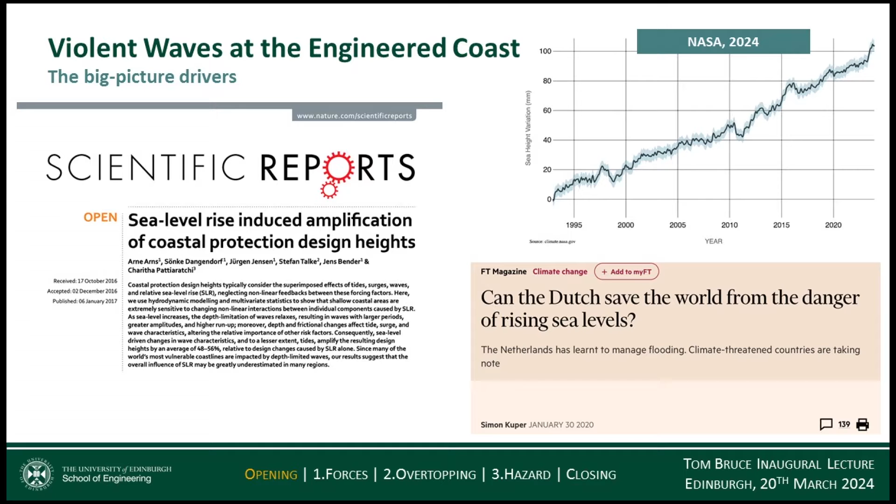And as we'll see later in the talk, 100 millimeters is quite a lot, because what happens at vertical walls when these waves are violently hitting them, the responses are very, very sensitive to the wave height, and they're very sensitive to the water depth. So the bigger waves can get in closer to structures on deeper water, and also if your structure is so high and the water has gone from here to here, your structure is not as high as it used to be relative to the water. So that's a big deal for us. And as you can see in the Nature technical report there, there's a real amplification effect with sea level rise and the responses of coastal defences.

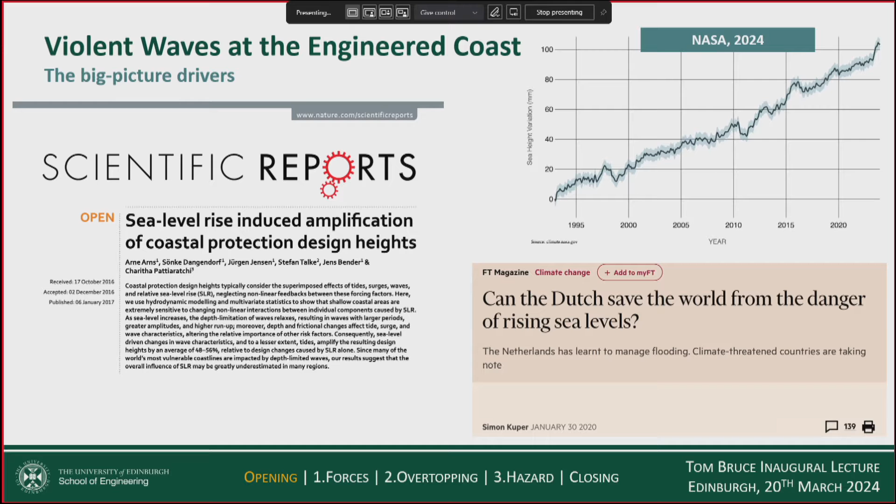Down the bottom right, can the Dutch save the world? Well, the Dutch, of course, can save the world. But the point of putting that in here, it costs. The Dutch have been investing in coastal defence since the disastrous North Sea flood of the mid-50s. And they invest something in excess of 0.1 of their GDP, year on year, decade on decade. And we don't. And so yes, you can defend if you're prepared to pay for it.

So one of the reasons for doing this work is to drive down uncertainty. Uncertainty is the enemy of costs in engineering. Having to manage large uncertainties drives costs only in one direction. And so if this work, of myself and all of the colleagues, can drive down that uncertainty, that is a contribution. So that's the context slide. Hopefully, James, that's satisfactory. Thank you.

We're going to now, if I can make this work, see what you think should be in a good inaugural lecture. This is where I first have to use the keyboard. So we do Alt-Tab, and we go to, where's the WooClap one going? This one. And hopefully we see what you said.

So what have you said? You've said, oh, I must have put my own name in there dozens of times at the start. Youngish-looking professor, fun. I started it off by putting short, but nobody's repeated that. One of my wonderful, amazing daughters put, don't have to wait 6 years. Thank you, May, for that.

So what have we got? Clear sound, wine, committed to live a good, don't know, good, we'll know at the end. So that's fun. Focus on the future, yeah, good. Fantastic, and some jokes. Okay, so thanks for that. We'll capture that, and I don't know if I'm going to be able to adjust my talk dramatically, but there's...

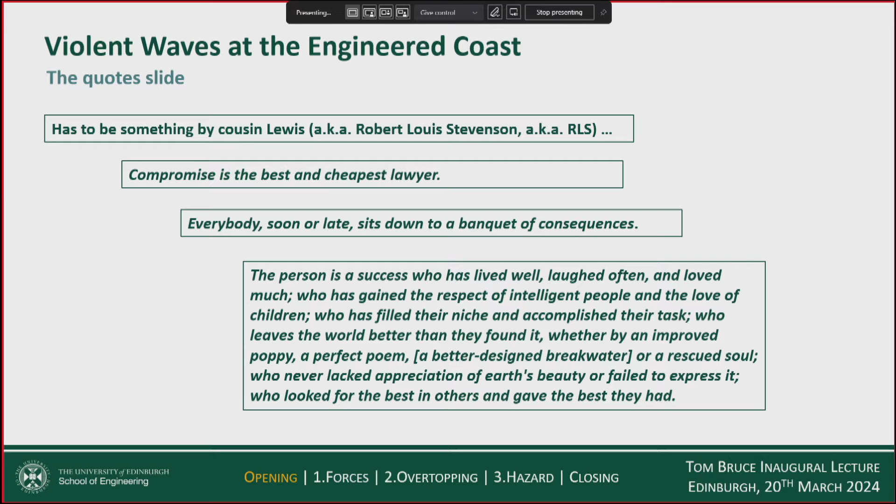So I won't do PowerPoint karaoke, but do take a few moments to read that or catch up, because I think these days it's very difficult sometimes to look at yourself and feel valuable and feel valued. I think it's a beautiful quote that hopefully absolutely everybody in this room can read and feel that you are worth it, you are valuable.

I changed it a little bit as well. I did think that there was probably a bit of, I'm sure RLS of course was from the amazing Stevenson family—I'm going to diverge and go over time, this is a disaster, I promised myself I wouldn't—but RLS was from the amazing Stevenson family.

His father, his uncle, his grandfather were amazing maritime civil engineers. They built some of the most extraordinary lighthouses in the most exposed places. Robert Louis was known as Louis in the family, and he changed his name as an affectation because he liked French, so he was born Lewis. Louis was meant to do engineering, and actually, Louis students here, he was one of you. He was a civil engineering first year, twice as it happened. He begged Professor Fleeming Jenkin to let him back in for another go, and he failed a second time. Then he went off to do law, and he went off to write. So he was not a great civil engineer, but he was a very extraordinary man.

Okay, so we're getting through, trying to gallop through the traditions of inaugurals. People put up wonderful maps of how they've trotted the globe around all sorts of amazing places, lived in amazing places and worked in amazing labs. So this is a very short slide for me. We might zoom in a little bit here, and zoom in a bit more. The good thing about this is you can see I've actually lived in more than one house.

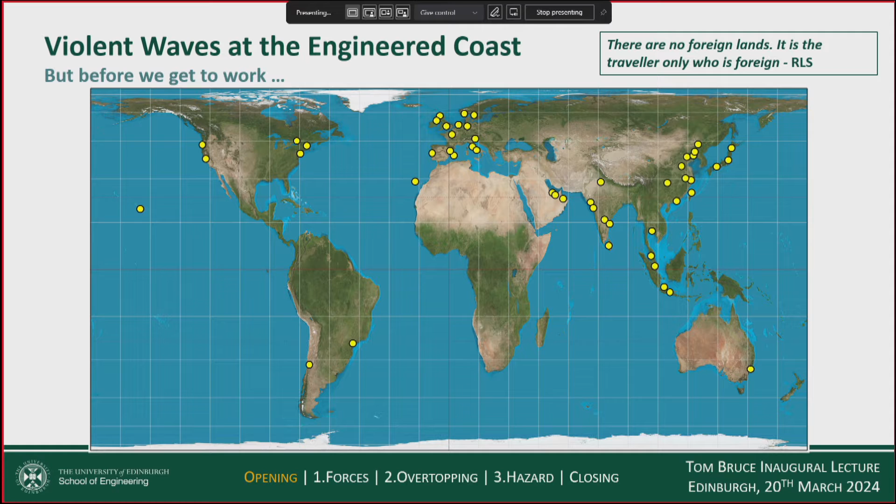I'm a little ashamed that I've never set foot on the amazing continent of Africa - that's certainly the next challenge. But I've been very lucky to travel pretty widely for work and also travel fairly widely for holidays.

And you'll see the green dots and the yellow dots don't all match up, so I've not just been traveling at your student fees' expense - you see most of these are proper family holidays.

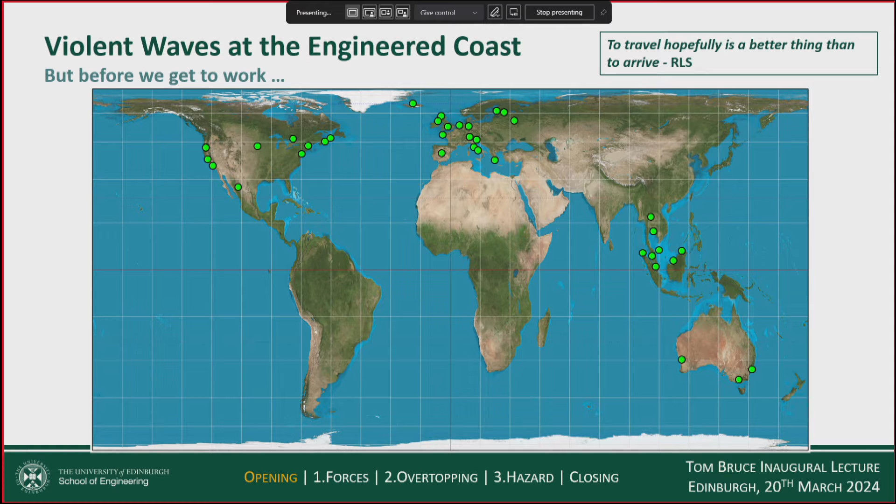And as a nice aside, I missed pointing you to the two little RLS quotes. I think the RLS quote up the top, he was just 130 years ahead of his time in some ways: 'No foreign lands, it is the traveller only who is foreign.' And the better known one: 'To travel hopefully is a better thing than to arrive.' Although we do like to arrive as well.

And the final bit of the intro is that we like to usually have action man or action person. So I don't get much time on the mountains, but I do love being on the mountains, so we share some pictures on the mountains.

My amazing family - that's Claire's graduation from the Open University last September, which was the most fantastic occasion. Bachelor of Arts with distinction from the Open University in English Lit. So we're all incredibly proud of Mom.

And down the bottom, the very cute Mark, not looking so cute in the bottom right with a whole bunch of fox poo on her, which took two washes, and thanks to May and to my sister Sarah for helping clean up the dog at the weekend.

So how did I get here? I got here starting out doing work with Clive Greated and Bill Easson and Dave Skyner, Matthew Griffiths, using a laser flow measurement system - a system called particle image velocimetry. It was mostly applied to water flows, but we hadn't applied it to waves before.

I bumped into a gentleman called Hocine Oumeraci, who was chair of coastal engineering at the University of Hanover at the time, on a visit there. Bumped into him in the staff room, which you wouldn't believe how smoke-filled it was. He thought this would be an interesting thing to do, and lo and behold, it really was. So we did some PIV to look at what's actually going on under the waves as they steepen and come and smash into vertical walls.

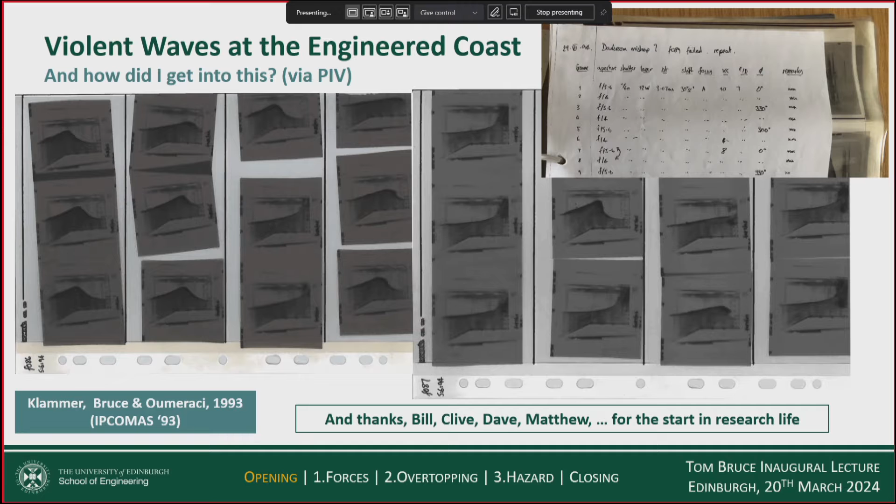It was really new at the time. You can see it was all done with a large format Hasselblad camera. If you look very closely up here, my lab book from the 29th of June 1994 says darkroom mishap, film 089 failed, repeat. So it was harder back then. If you got things wrong in the darkroom, you had to go back and do all the tests again.

That got me into this whole idea of waves and breakwaters. So finally, this is what we're going to do. I've been involved in a variety of bits of research. I've been very honoured and very proud of being part of the Institute for Energy Systems when it was formed, and I've had a number of projects in marine energy. I'm still active in marine energy through our Industrial Doctoral Centre for Offshore Renewable Energy, supervising projects there and doing a little bit of teaching. I've been active in hydropower a little bit too, but I thought for today we should stick to one theme.

So I'm going to try to stick to a road through violent waves at the coast. We could have done some other things, but I'm going to stick to that because that's been the constant narrative through these 25 to 30 years. So we'll have a look at wave forces, the forces on the structure, we'll have a look at wave overtopping, what goes over, and we'll have a look at hazard. That's the plan for the next hopefully about 35 or 40 minutes.

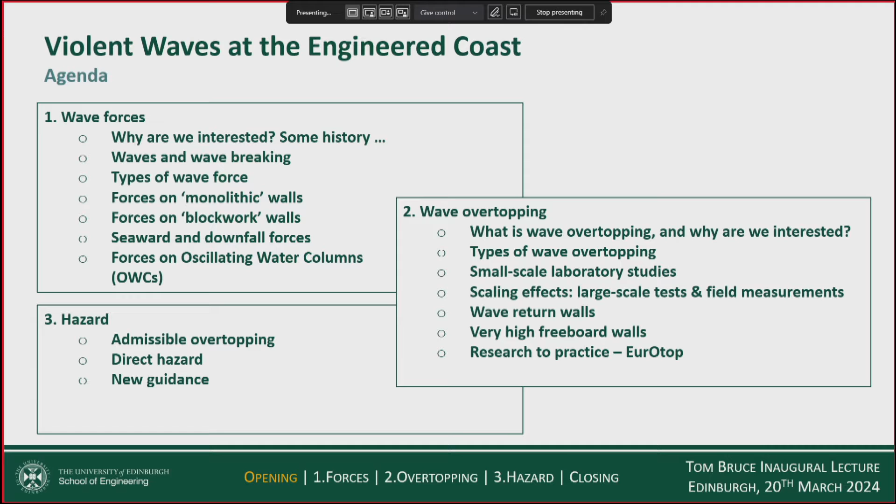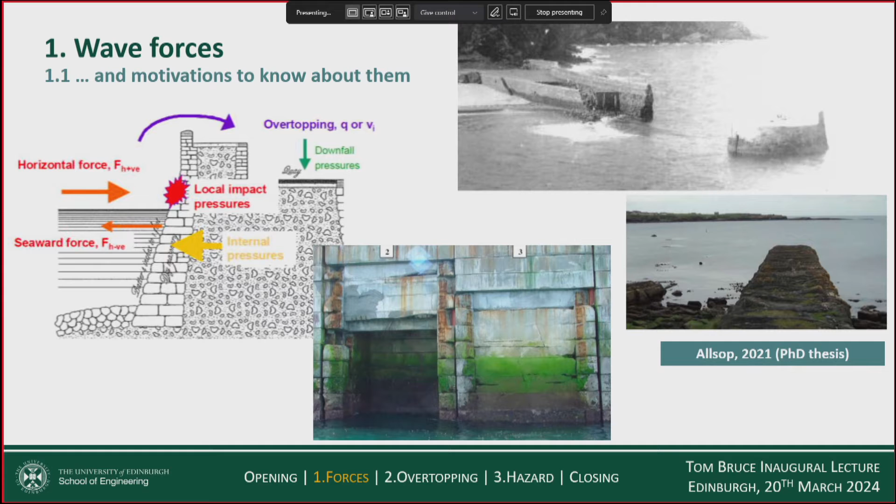So this tells you it's a complicated loading system. You would intuitively get the big orange arrow here, the horizontal wave force on the structure. You might guess that we might get this red splat, which is the breaking waves on the structure, the impact loads. You might also guess that we had some water going over the top, which could load the structure. Few of you would guess the right to left arrows, the seaward forces. We can get seaward forces due to a difference in the internal pressure in the structure to the pressure outside, and due to the way in which the wave is interacting with the front face of the structure. So we can get seaward forces as well as landward forces.

So we're going to take a little gallop through some of these over the next slides. I had intended not to include any photographs of anybody in the talk, but I really felt that I should put this one in for Clive.

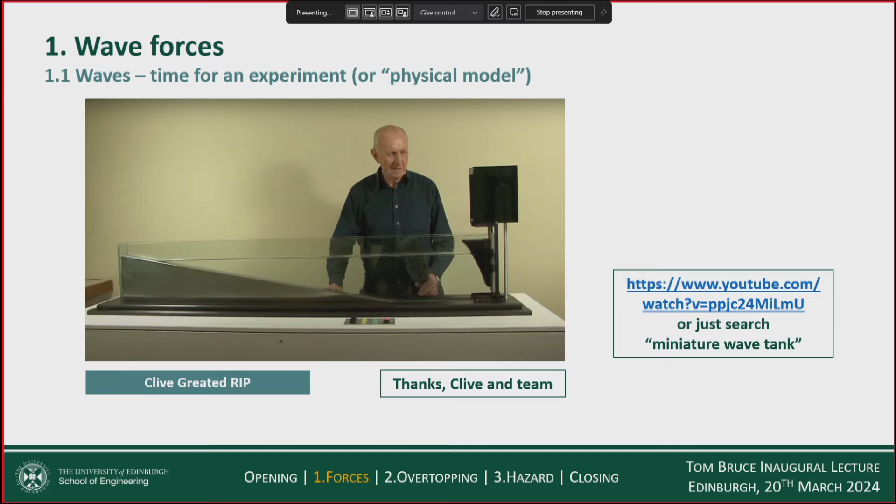Because what we're about to do is use this little wonderful piece of apparatus that Clive, his research team, and the technician team over in physics put together many, many years ago. Clive's daughter is a lecturer at the Glasgow School of Art, and she and her dad put together a really special exhibition called Coast, bringing together science and engineering and art around the coast. And the centerpiece of it, this is the great reveal, is this rather beautiful little wave channel.

Everything is in perfect miniature, and the paddle is still in the right place, I hope. We will find out in a second. It looks pretty good, I think. So thanks, Clive, for putting this together, and thanks to Clive's family for pointing me in the direction, and thanks to colleagues Neil Wood and Jim Folek in physics for having looked after it so carefully and finding it and letting me borrow it for this talk. If you want to see Clive in action, you can search miniature wave tank on YouTube and you can get Clive's original commentary. So thanks, Clive, and we are thinking of you.

Okay, so what I want to do then is play with this. With a bit of luck, if I put this behind and press the right buttons, we'll get a good view on the camera, which means those of you who've chosen to sit right at the back will still get a decent view. So hopefully that will go there. And if I press the right things here, that one, then we might have a magic wand. Well, hey, we do. This is where in class we zoom in on the sleepers. Which of course we don't have to do too much. So with a bit of luck, I will be able to run this and point this at the flume as a wand and let those of you further back actually see what's going on as well. So let's get it started and have a look what we see.

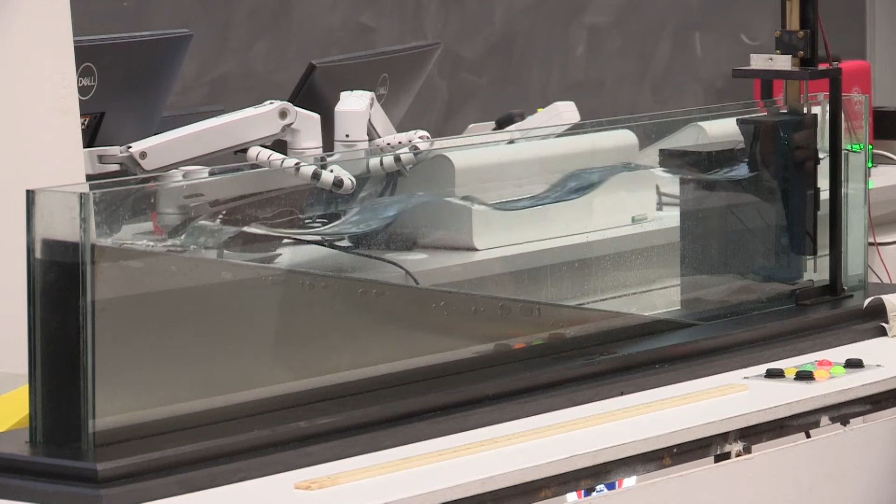So what happens? And we could do a couple of lectures on this stuff. We can put in different slopes. We can look at different behaviors. But what we want to do here is put in a vertical wall. Okay. So thank you very much, Andrew, for the vertical wall. The wonderful thing about tiny flumes is that everything is extremely quick and easy to do. It's quick and easy for Andrew to do, not for me. I'm sorry, Andrew, I was very disorganized. So let's put the gentle wave in. And I'll put my wand over here again. If we put this little vertical wall in reasonably deep water, you can see that the water's running up and running down.

The wand is in a good place. Okay, so that's what we might call a pulsating load. It's not terribly exciting, it's reasonably easily predicted. This is a very simple flume, so the wave energy is just being reflected back to the paddle, and it's reflected back off the paddle and coming back down. Whereas in reality, the wave energy goes back out to sea.

More sophisticated flumes, any serious scientific flume, the wave energy is reabsorbed at the paddle, so you don't get that build-up of energy. So if we put this in a little bit further up, we're going to see something rather similar. But if we happen to put it in where the wave is breaking, we're going to see something just a little bit different. I'll just start it again.

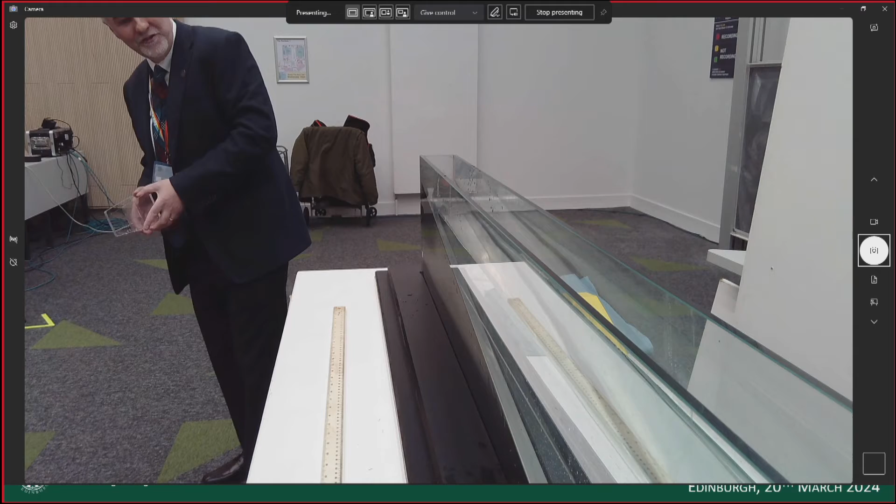You'll notice as well that if I stop it with the vertical wall in, it takes a while for the energy to dissipate, and if we let nature do its piece and dissipate on the beach, on the foreshore, it dissipates very quickly. We could do that with the rough wave, and we can see in reasonably deep water that we've got, again, pulsating loads, so slowly varying loads, but this time we've got some overtopping.

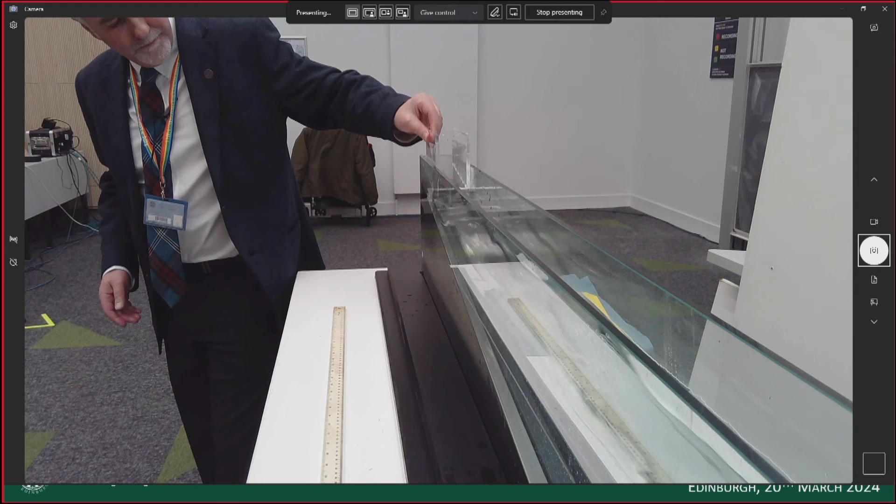Now I'm going to take it out before the standing wave builds up too much, because we don't have any absorption down here. If we go slightly shallower, same thing. But if we go to where it's breaking, we've got something quite different, okay? So you can see that just that change in water depth makes a really big difference to what we see.

Right. So, I could hide now, could hide behind here for the rest of it. Our photographer would kill me afterwards, or kill me during.

Okay. So, here's one we did earlier, if I could press the correct buttons here and go back to the presentation. With a bit of luck, we can have a close-up view here. And of the fast one. What's more interesting is if we slow things down.

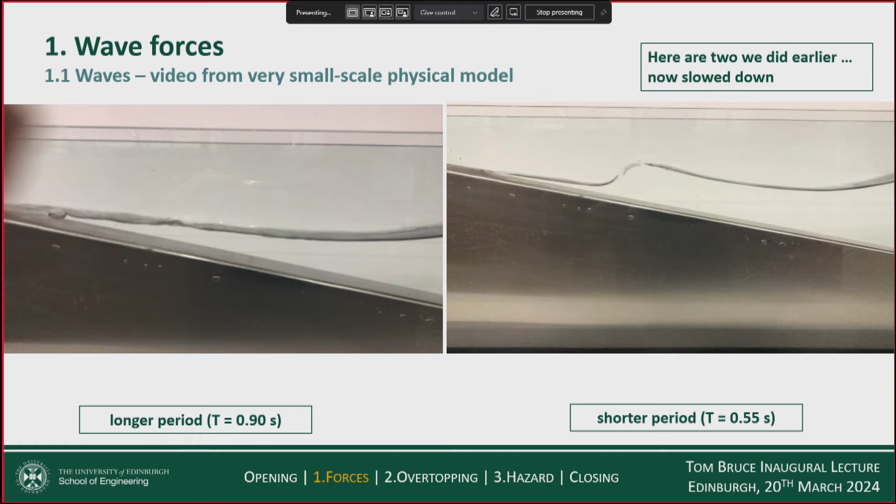So I said that research costs money. This was taken with my iPhone 8, which cost me £8.50 a month with Tesco. It's quite extraordinary. You guys who are working and a good deal younger don't realise this, but this would have been undreamed of. It would have cost a fortune to get a camera that produced anything like that.

Risk of diversion again. Our first digital camera that we bought for PIV had a frame rate of 1 frame every 2 seconds. It came with a cooling unit. It had 4,000 pixels and it cost £25,000. And it was monochrome. That's where digital cameras have come since about 1993. So big changes. And there's the slowed down one.

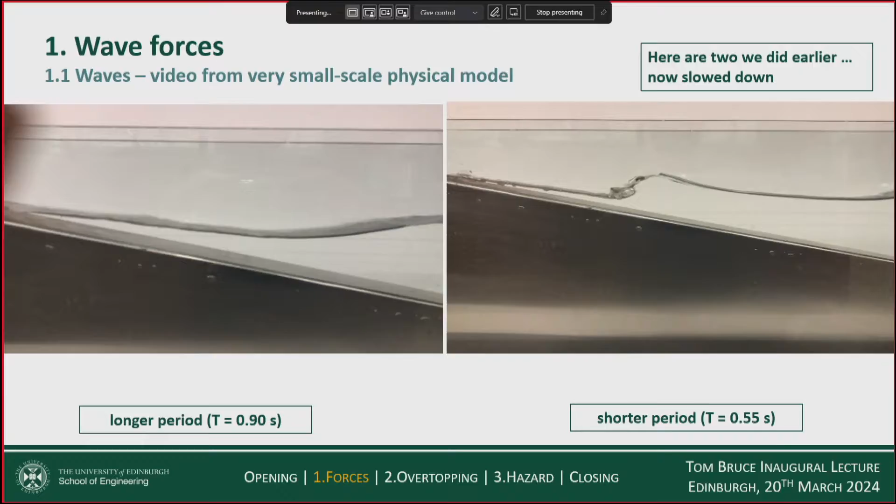So you can see the wave. Now, this is not a really accurate representation because this is such small scale. In Fluid Mechanics 3, we used to do a piece on scaling. I think it's probably still in there. And waves scale beautifully down to lab scale to a very high degree because everything's dominated by the interplay of gravity and inertia. But when you get really small like this, then surface tension is unrealistically big. And so the surface tension effects in the very, very small flume make this a little bit unrealistic.

Also, this is fresh water. The way in which bubbles behave in fresh water is different from seawater. And of course, the bubble doesn't know what size of wave it's in. And so the bubbles here are not behaving in a realistic way. But nevertheless, the overall kinematics are indicative of what we would see in a bigger flume or indeed in reality. And I think it gives you a nice sense of reality, seeing something almost tangible like that. I was going to do this bit later, but in the interest of time, I thought I'd put it all together.

Andrew also made me a Dutch sea dike to go in here. I'm not going to put it in right now. I filmed it earlier. Actually, it's not really a Dutch sea dike because it's at a 1-in-2 slope, and nobody except the British would build a 1-in-2 slope because it's the worst case for wave overtopping. So this is not a Dutch sea dike, it's a good British sea dike. But we can see some different effects on there.

So I did the same thing, I put that in, and what to look for here is that we're getting a different type of breaking. So there we had a little mini plunge, and here we've got waves that are really surging up the slope. And that's for the longer period wave. And if we put the shorter period wave in, we see the wave collapsing on the slope. And we can write a little spreadsheet that tells us what we expect and see if the type of interaction of the wave and the slope in the model is the same as what we expect in reality.

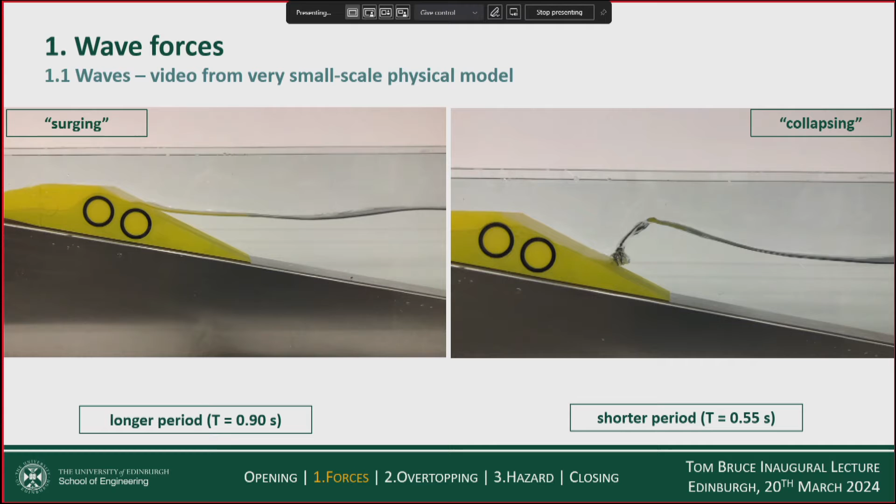So, I was going to do a bit of Excel Live. My students are probably fed up of Excel Live anyway, so we're not going to do it live because it was making me worry about the AV. So we do it almost live.

Just to show you how things scale. This is our little flume here with a 0.9 second wave and a 0.55 second wave. And the way that scaling works is that if we have a scale of 10 to 1 in geometric scale, then we have to scale the wave period by the square root of that, so about 3. And so if we reckoned that this was a 10 to 1 scale model, then that would give us a 3-second wave and a 1.7 second wave. Still really tiny waves, so that doesn't make much sense.

So if we tried something bigger, if we imagined this was 1 to 50, that would give us a 6.5 second wave and a 4 second wave. So it's still pretty short. Those of you that spend time at the seaside, if you're down after a storm somewhere, even on the North Sea coast, the waves could be coming in every 8, 9, 10, possibly even 11 or 12 seconds. If you're on the Atlantic coast, certainly 11, 12, 13 seconds. So this is still

rather short. So if we imagine 1 to 100 scale, we'd have a 9-second wave and a 5.4 second wave, still quite short. And so I reckon that we're something like a 1 to 200 scale here, because that means that our longer wave is equivalent to about a 13 second wave in reality, and our shorter wave is about a 7.5, 8 second wave. So those are quite interesting real waves to think about. We could spend a lot of time playing with the spreadsheet, and we won't do that. But scaling is a wonderful tool in the toolbox of fluid mechanics modelling, physical modelling of this type of system.

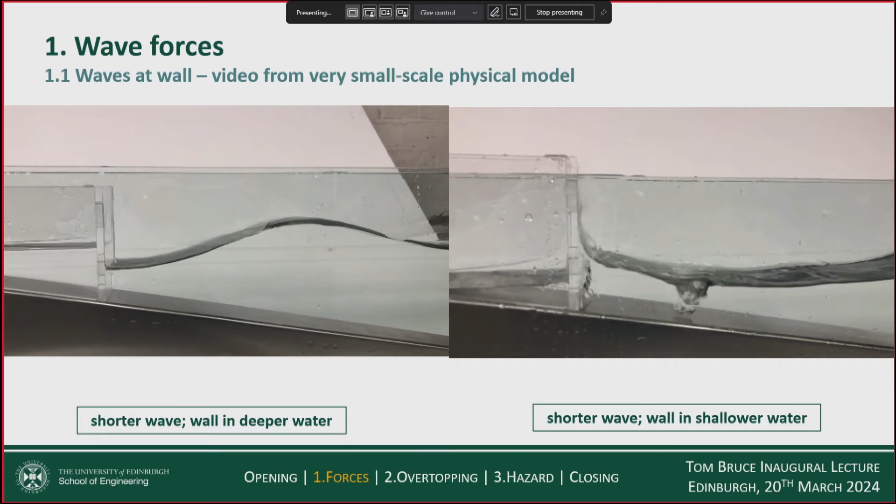So this is what we got when we put the wall in. I'm doing this just to make sure that people on Teams can see it. And so on the left is our pulsating loading, and on the right is our much more violent loading, what we might call an impact, or impacting conditions, or impulsive conditions. Okay. And we got the sound as well.

This is jumping ahead to section 3, which we'll get to, I hope, in good time. We're interested in what happens to people on the structures. How you scale a person at very, very small scale is not really well nailed down. We know that the person's stability, or in this case, the small screw's stability, is a balancing act between how much friction is available between their feet and the surface on which they're standing, and the drag force of the water around their legs. Drag force goes as the frontal area of their legs, so it goes as the square of a length scale, and it goes as the square of the speed.

The available friction goes with the mass of the person, and so it should go as the cube of the geometric scaling. So we ought to be able to scale the person correctly such that their available friction is at the correct scale to the drag forces from the water rushing around their legs. I did this very, very roughly, and I reckon that the scaling should be somewhere between cubed and squared, depending on the wave speed coming in.

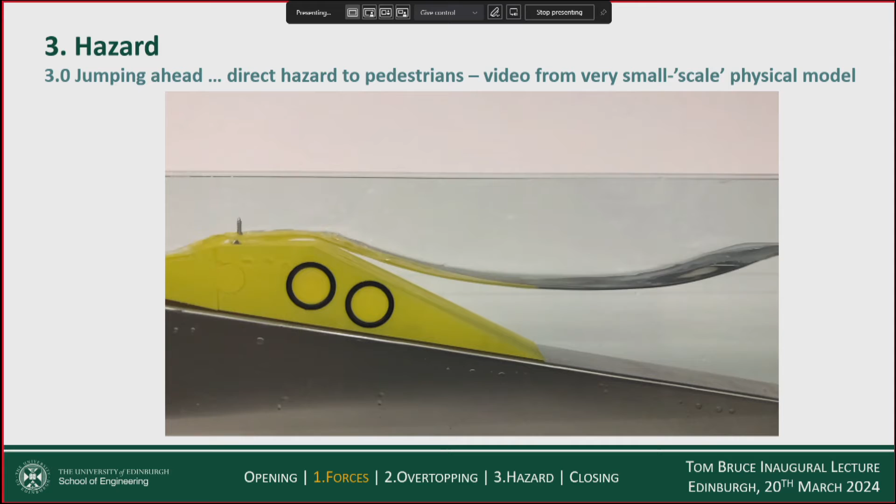And so I found something just under a 1 gram mass to represent a 60 kilogram person at 1 to 200 scale, squared and a bit. And we can see that I went through quite a few of these to try to get this just right, but we can see there we've got the drag force on the little person exceeding the available friction between the person's feet and the surface. So there we go. Off to safety, we hope.

Okay, so let's scale this up one. So this was tiny scale. Let's scale it up to our lab scale, the little flume in the Sanderson building.

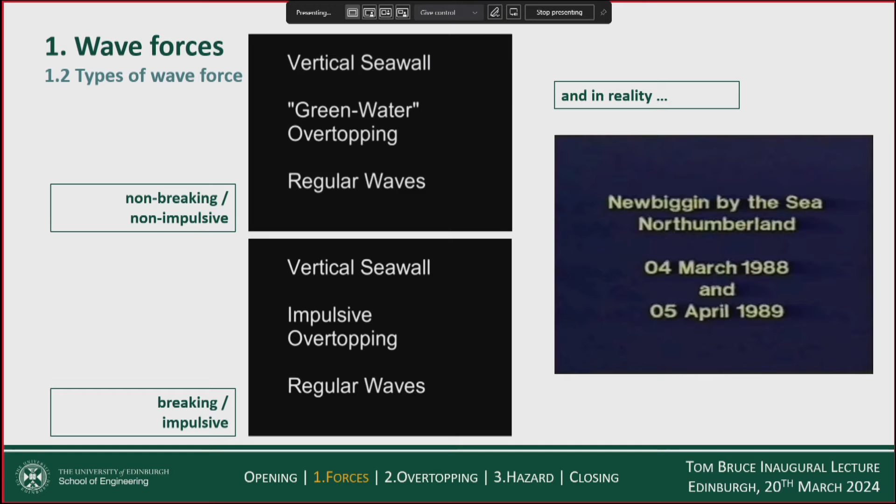And thanks, I think Tom was in the audience. I think Tom took these videos very, very long time ago. Still known as Young Tom, Tom Davey, now big boss of FloWave, then possibly even my MEng student or PhD student at the time.

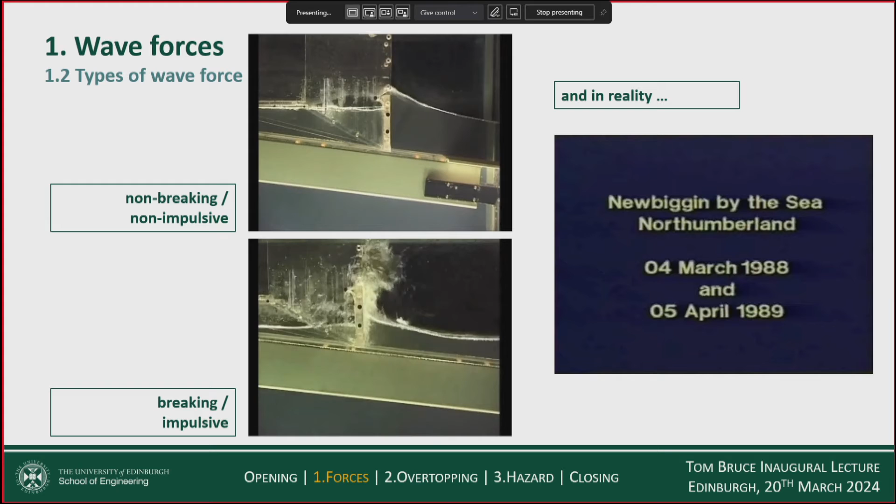So this shows the slowly varying waves, what we might call green water overtopping and pulsating wave loading. If we look at the situation where the waves are breaking, we see this, and we see something a bit more realistic. The waves are better controlled. The scaling is a little bit less extreme. The influence of surface tension is probably much, much less of a concern. This is probably at a notional scale somewhere around 1 to 40, 1 to 60, 1 to 80.

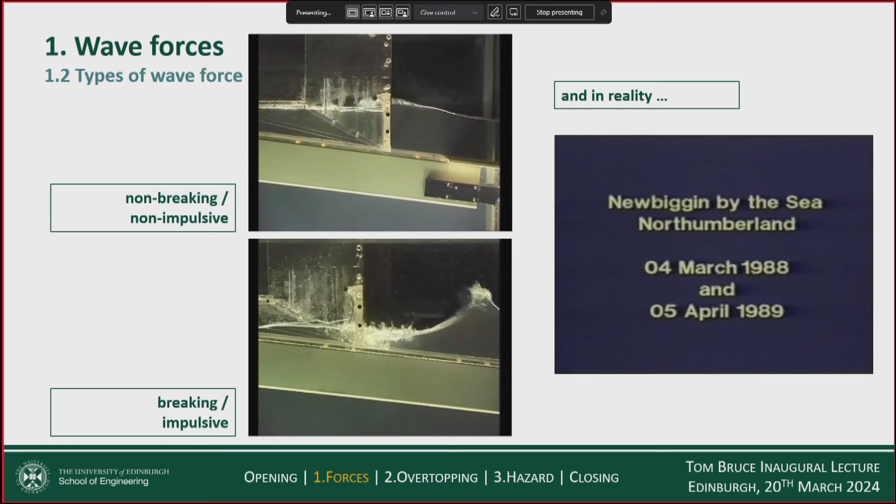And then what about the last step up in reality? This is a very, very old movie, but I do love it because it shows you really nicely what happens in reality. When it runs, go on. It ran beautifully when we started. Let's just try one more time. Here we go.

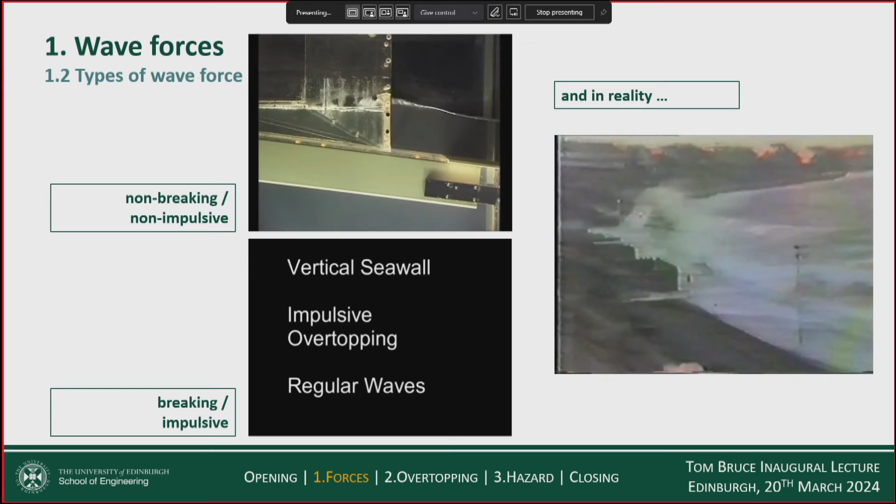This movie is so old that they've entirely rebuilt the waterfront since this movie was made. But what you can see is that switch, okay? It's not a gradual change from not too impulsive to a bit more impulsive to very impulsive. It is this sudden change from nothing much to bang. It's just when that wave front just reaches just that right shape and interaction with the wall, and you get that very violent, that very impulsive type of interaction.

What does it look like in the lab? Again, this is an old graph. This goes back to PROVERBS project days and Diego Vicinanza and Janice McKenna down at HR Wallingford. And if you put a pressure cell and look at what you see on the front face of the structure, you see lots of little ups and downs, these pulsating loads, but once in a while you see this bang, this very, very sudden impact load. And so you can see you really need to understand those in distinction to the slowly varying loads.

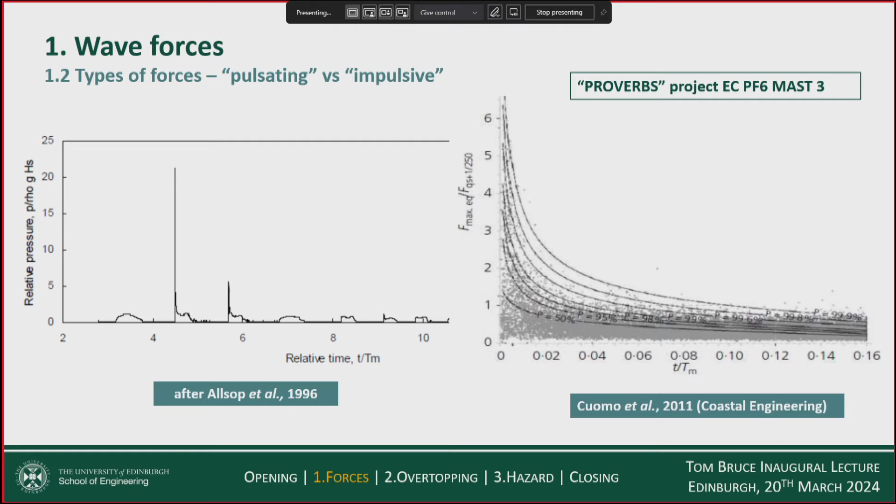We won't have time to drill into this too much, but there's a trade-off between the length of time that impact lasts and the intensity of that impact. So the very highest impact pressures or impact forces tend to stick around for the shortest time. That's very important because if you're impacting a wave on a very giant, many hundreds or thousands of tons of monolithic concrete caisson with sand fill, that's got a lot of inertia. And by the time it even thinks about moving, the force is gone.

Whereas if you've got a structure with much smaller elements, maybe a crown wall or maybe like blockwork structures that we're coming onto, then the structure might have a chance to respond to that and it could be much, much more dangerous.

Those doing fluid mechanics too will be used to the idea of if you've got two different regimes, you need two different sets of models, and you also need a discriminator. You need something to tell you which model to use. So the first thing that you come across in fluid mechanics is Reynolds experiment, and you need to know whether the flow is going to be laminar or turbulent, and so you use the Reynolds number. It's not quite as simple here, but we've got this wonderful parameter map put together by some familiar names under the PROVERBS project, which tells you as an engineer the combination of your structure geometry, your water levels, and the wave conditions, what sort of loading to anticipate and to design for.

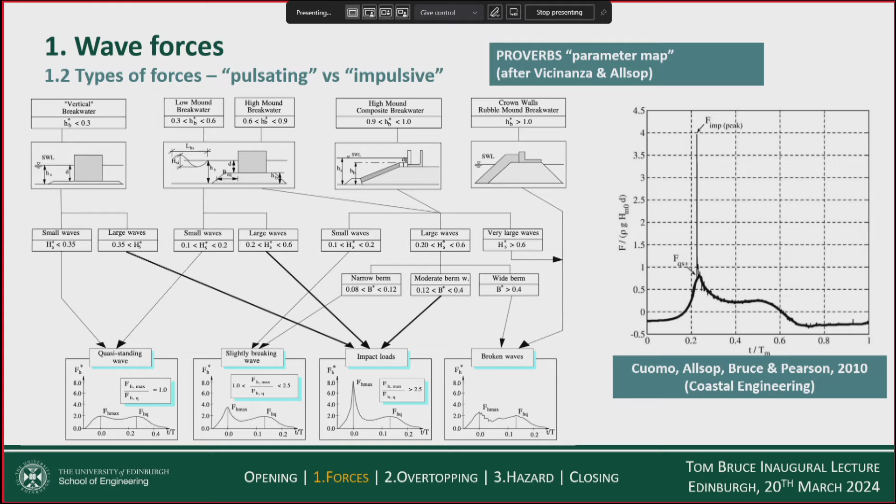So I mentioned blockwork a few moments ago. This is where impacts could be really, really interesting. There's a lot of old coastal structures out there. A lot of old coastal structures, many of which don't have big money behind them, many of which protect ports of very little or no economic significance. They may not have, or almost certainly will not have experts around to monitor them, to assess their condition and to design repairs.

So the example there on the left is Arbroath, the roundhead at Arbroath, and you can see down here, if you've been doing coastal engineering as long as I have, you can spot there's a missing block there. And you can see that there's been vernacular repairs done, attempts to bind together the blocks in all sorts of ways, with mortar, with grout, and with bars. So there's all sorts going on there.

This is from the beautiful old pier at St Andrews. You can see the pier at St Andrews isn't straight. It's because at the time of the late 18th century, the engineers were choosing to follow the natural rock skerries to minimise the difficulties of building that pier. And again, you can see that there's a block missing here. That's a dry stone construction. It's open fronted. There's no grouting. There's no mortar between those blocks. That's designed that way as a dry stone.

So what happens there when impacts happen? Well, this was some work on the right led by Gerald Müller, then Queen's Belfast, now Southampton.

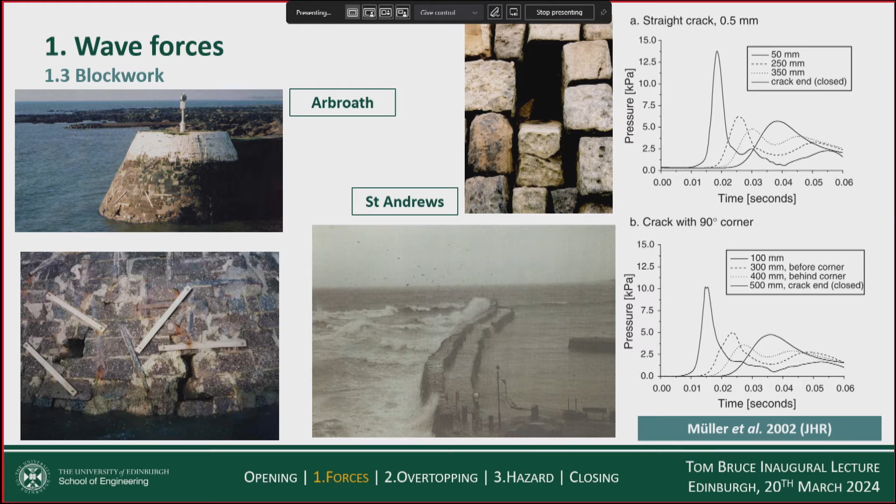What happens if your impact pressure here goes into a crack? Now, Gerald built a lab crack, and he instrumented it. And he watched what happened to a pressure pulse as it went into the crack. And the news was not good, because the pressure pulse propagated all the way to the back of the crack, which was quite some distance. And then it bounces off the back and doubles and comes back out again. So it's pretty bad news. It's the worst news you could have for pressure in a crack.

And then Gerald put a right-angled bend, a 90-degree bend in his artificial crack, and the pressure hardly noticed it. It just went in and back out, just like it was a straight crack. So there's some fairly scary stuff there, which is the subject of a current research proposal that is being led by Alison Raby down at Plymouth, with some support from colleagues at Cork and Edinburgh, and also William.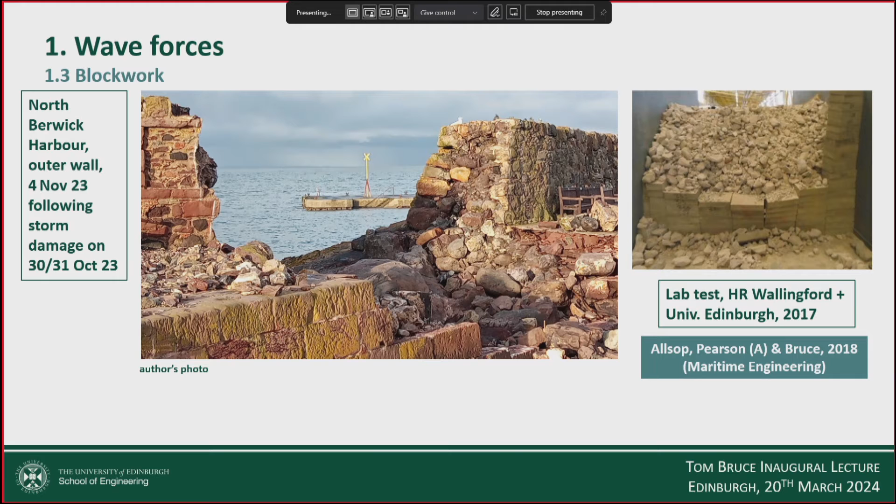But it's just a reminder that these things go wrong and are costly. We'll be looking at something in excess of £1 million of work to get that back up and running. And on the right there, some lab tests conceived by William and conducted by Adrian Pearson down at HR Wallingford on failure of blockwork structures.

Next step in wave forces is impulsive seaward forces. I'm not going to dwell on this because it's a niche, but I think it's a really rather lovely niche. It was an idea, I think, first brought forward to the PROVERBS project by Jentsje van der Meer, who's with us this evening, and we went to test this in Edinburgh. This is what's called a low-crested breakwater. It's designed to let water over under the highest sea conditions. So it's a trade-off. It's going to cost less, but you're not going to protect your harbour for quite the same proportion of the time.

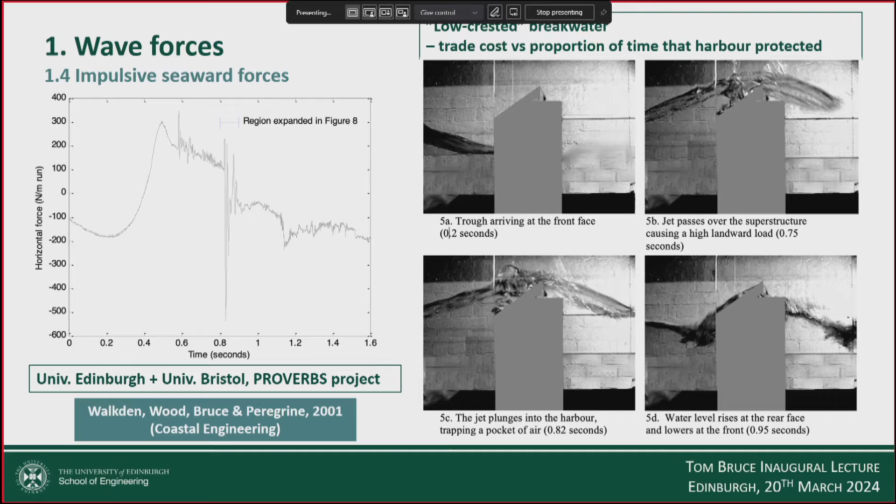And if the wave goes flying over the top, can it impact on the water on the landward side or the protected side? The answer was very, very much yes. This is a graph of the horizontal force, and 0 is here, and the stuff above 0 is the way you expect that horizontal force to go, which is towards the land. And you see this great big spike down there. So a very large impulsive horizontal seaward force as that jet impacts the water behind the structure, trapping the air. So it's a niche, but I thought I would like to share that because I think it was a rather beautiful little piece of work.

Together with colleagues at University of Rome Tre, Leopoldo Franco and Paolo Alberti, we conducted some small-scale experiments here in Edinburgh. Gerald and colleagues did similar larger-scale tests in a very large flume in Germany. We found that the downfall pressures could be of the same order of magnitude as the largest pressures on the front. So these are huge pressures.

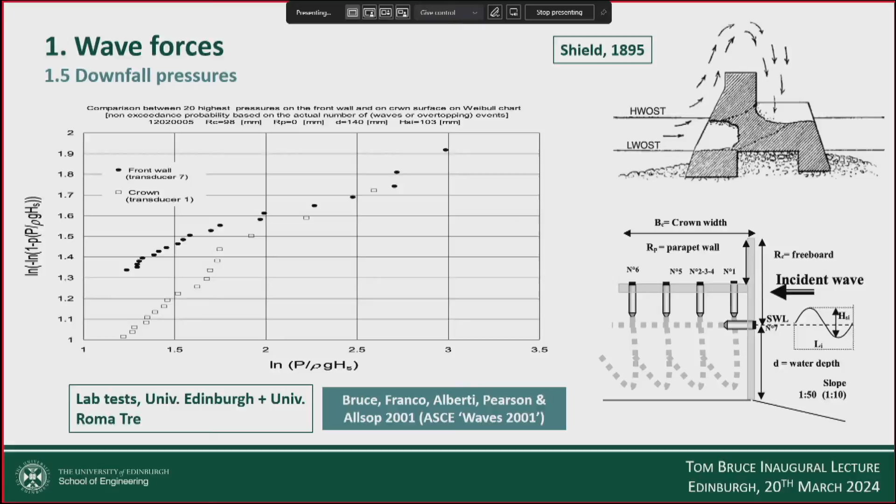I did waste about an hour of my preparation time trying to find an old photograph I took at Peterhead North Breakwater. We coastal engineers really know how to live. We live our life on industrial ports on breakwaters.

A manhole cover had been dished by downfall, bent down. This is a test for the structurals in the front here - by measuring the deflection down of the manhole cover, with knowledge of the thickness and dimensions of the cover, you can use Roark's formulas for stress and strain to work out what force must have been to create that. The force is in very good agreement with what the lab tests would have suggested. I wanted to show you my really sad photograph of a dished manhole cover on Peterhead North Breakwater, but I couldn't find it, unfortunately. That was a nice piece of work, and I think very helpful.

Just before we leave wave forces, let's look at where coastal structures meet wave energy. The oscillating water column is a class of wave energy structure built at the coast. To me it's possibly one of the most interesting types of wave energy device because it's relatively simple. The devil is in the detail, of course, but the concept is simple. The maintenance is potentially simple because it's at the coastline or close to it. But it is, in fact, a very complex loading system.

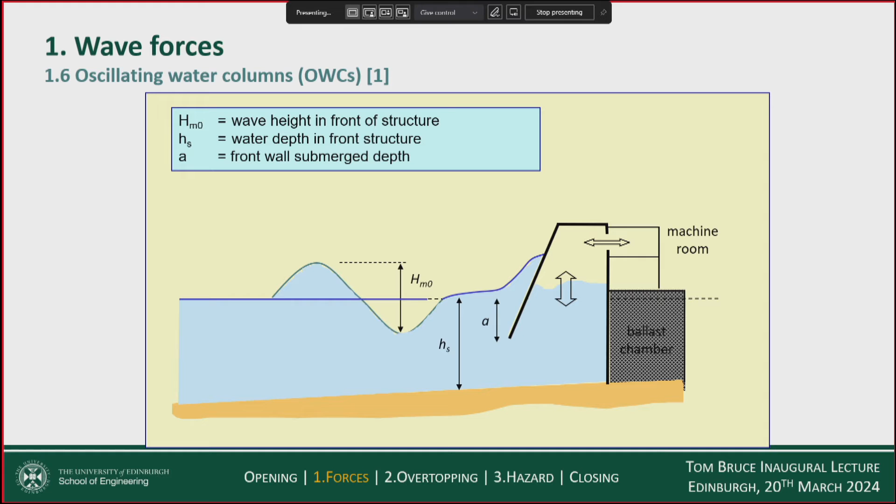The idea is that the waves run up and down on the outside of the structure, and the changes in pressure drive a column of water up and down within that chamber, which in turn drives air out of and into the chamber through a turbine, generating electricity. But it's actually a very complicated loading system - that's witnessed by what went wrong at Mutriku.

There's a picture up top right of how Mutriku Harbour looks now. The Bruce family, funnily enough, found themselves in Mutriku en route to a holiday house in Spain. I don't know how that happened, guys - I'm sorry about that, but we found ourselves with one of the world's most interesting wave power stations. This is a beautiful little village on the Basque coast of the north of Spain.

This is a conventional rubble mound, but this bit in the middle is the wave power station - 16 chambers of 20 kilowatt generators. It looks beautiful now and is working very well now. But this is how it looked during construction, because it was hit by the design storm during construction. You can see we're not going to generate much energy when the chamber is open to the wide world, as it was there. A bit of forensic engineering there.

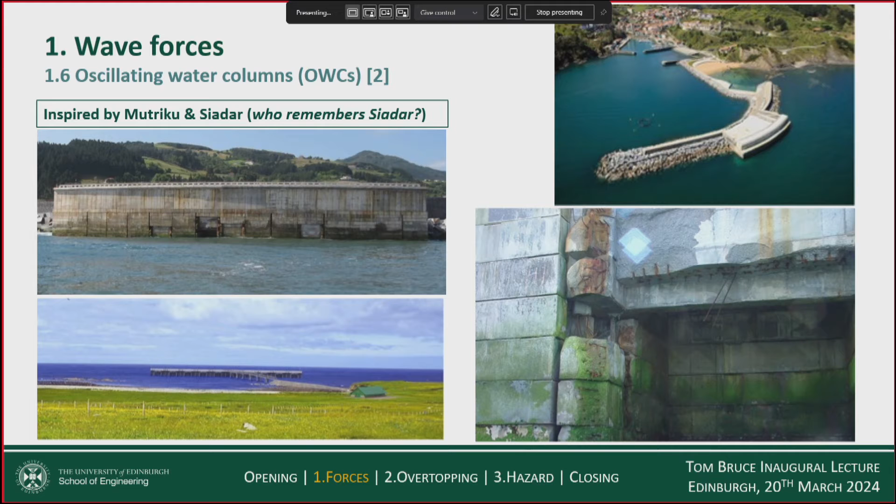You can't see too clearly in the picture, but the reinforcing bar that has been broken as the concrete structure exited is bent outwards and not inwards. So that structure exited seawards and not landwards due to pressures within the structure - it blew out rather than blew in.

I don't really have time to tell you the story of Siadar, but this was the wave power station which was never to be, on the northwest coast of the Isle of Lewis - a fantastic wave power site exposed to the Atlantic, looking across to Canada. Originally conceived as a 4 megawatt station and eventually uprated to a 20 megawatt station, it eventually, unfortunately, didn't come into fruition due to delays in the ability to remove large quantities of electricity across the Minch to the mainland. So that is unfortunately no more.

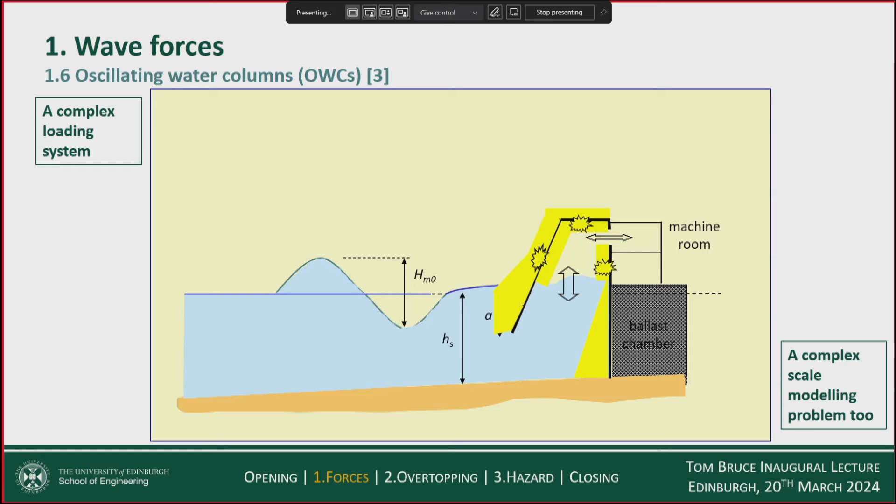So this is a complex loading system. We might have pulsating loads on the outside, impact loads on the outside, downfall pressures. We'll certainly have pulsating loads on the back wall of the chamber, and we might well have impact loads there too. We might even have slam loads on the ceiling of the chamber. So a really complicated system.

I reckon I have a good idea about once a decade. My good idea for the 2010s was to request a camera be put inside the chamber of some very large-scale tests that the European Commission Hydralab project very kindly gave us time to test in this giant wave flume in Germany.

So what you see there at the top is what happens if you close the exit to the chamber, so no air can get in and out. That's no use for generating energy, but it's rather beautiful because you can see the pressures rising and falling. You can see the vapor pressure being reached at the low pressure end, and you can see the condensation coming and going. And that's in real time.

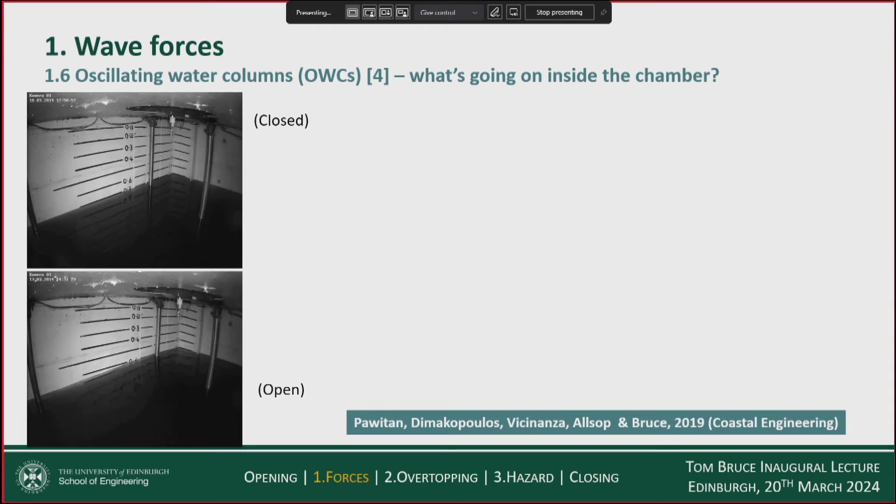Down below is this beautiful situation of an oscillating water column working just as the textbook would say, column rising and falling rather beautifully and generating lots of energy just exactly as you calculated.

Things get a little bit different in reality. We find that you may get a little bit of sloshing, you might get quite a lot of sloshing, and you might get really big problems. This was a topic of my fantastic Indonesian PhD student, Krisna Adi Pawitan.

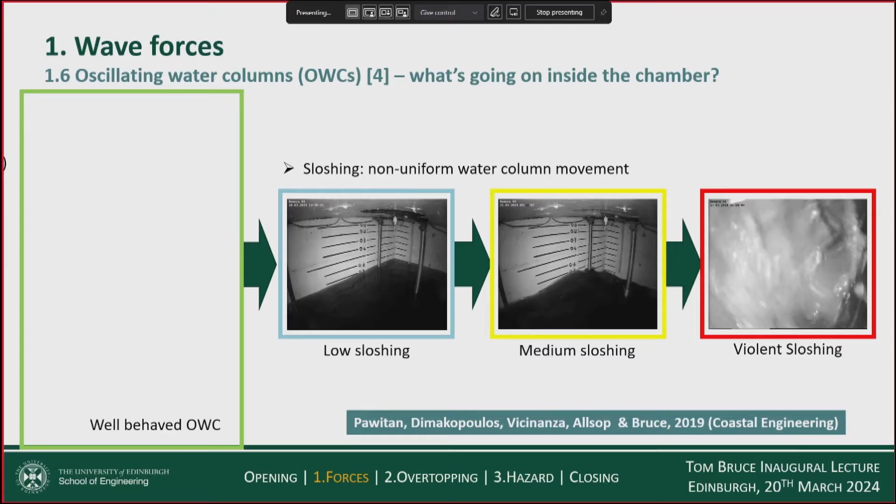Krishna via Japan is now at Princeton. His map would be much more interesting than mine, and he's only 28 years old or something. But anyway, thanks Krishna for the amazing work on that, and thanks to co-authors and colleagues who participated in the tests in Germany from University of Naples, from HR Wallingford, and Allsop Consulting.

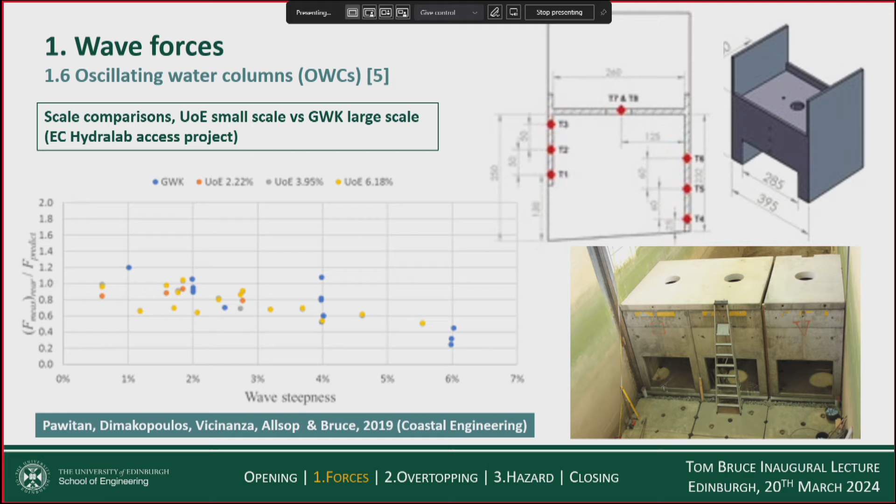I'm not going to dwell on the scaling, but this scales. Another part of Krishna's PhD was to work out how you can scale this, because OWCs have got air and water all going on at the same time, and that's very, very challenging for scaling. But Krishna came up with a way that we could use small-scale models, a bit bigger than what I've got here, but about this size in our flume over in the Sanderson building, to investigate these effects very effectively at small scale, which is cheap and quick.

So phase 2, and I'm not too far behind schedule, phase 2 is wave overtopping. Why are we interested in wave overtopping? Well, there's certainly at least three reasons.

One is for flooding. If a wave comes over your defence, it may cause flooding backshore. And to predict the levels of flooding, or to decide how much overtopping we can allow, we need to know a mean - just a time average of the overtopping. We usually call that discharge Q.

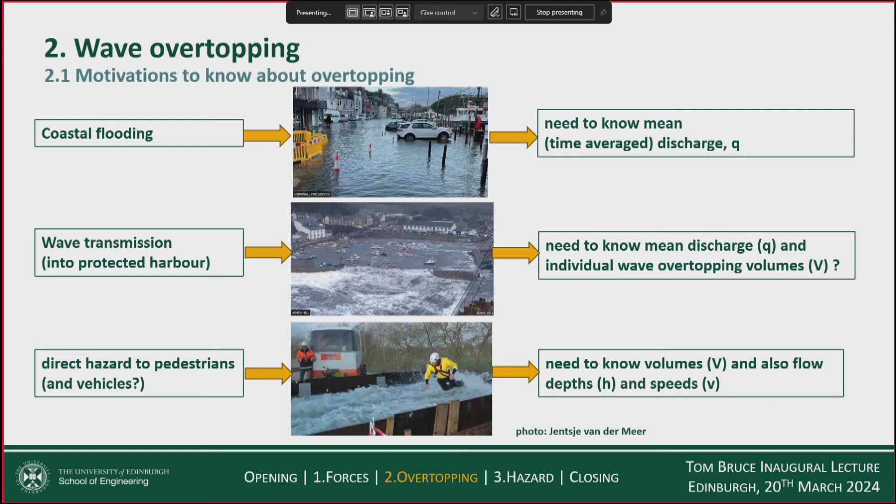We might also be interested in individual wave overtopping discharges because it's the individual wave that will batter your expensive boat if it's moored just behind the harbour wall. And down at the bottom of this picture, from a recent study by Jentsje - we'll come back to that study in a few minutes - we're interested in direct hazard to people. For that, we need to know the individual volume, wave by wave by wave, not the time average.

Actually even better, we'd like to know what the fluid's doing around people's feet - what's the flow speed and what's the flow depth. So that's the three reasons to be interested in wave overtopping.

It actually took till about 2010 for Jentsje, who's in the audience, to really get back to the detail of what was in those tests to work out who was right and who was wrong. The very happy outcome was they're both right, but the situations were slightly and subtly different.

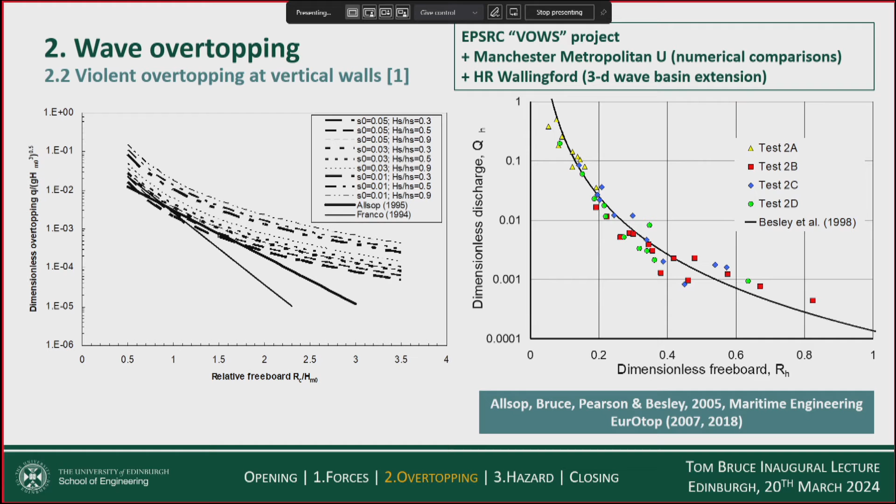This line here was due to Phil Besley. Phil was taken from us far too young—8 years ago now, 9 years ago. Phil was my external examiner, so we miss you, Phil, very much. This was Phil's line from HR Wallingford tests, quite a substantial set of tests, but we set about a very, very large parametric survey of tests of overtopping under these breaking wave conditions. We couldn't break Phil's line, but we were able to augment it and corroborate it very, very successfully.

So that's small scale. A recurring theme of this evening is scale, right? So what do you do after you've done the small scale? You do the small scale first because it's cheap, it's easy. This is micro scale—you wouldn't do this because it's probably not accurate, but in the lab we're pretty good. But you do want to go up a step to large scale.

So we were very, very fortunate to win 12 weeks of project time in a very large wave channel in Barcelona. I'd actually wanted us to get into the channel in Germany, and I was slightly disappointed when we got to Barcelona, and my colleague William said, don't be ridiculous, this will be much more fun. I think he was right—it was a wonderful place to work, and a wonderful team at the lab there at the Universitat Politècnica de Catalunya who supported our work there.

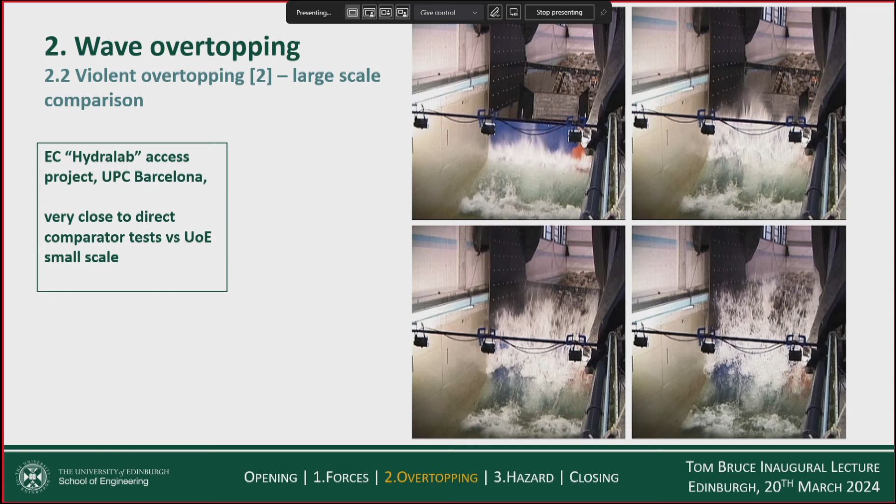So these are much, much bigger waves. I don't have a person in there so you can't see the scale, but these are much, much bigger waves. We wanted to see how we were getting on with scaling, so we set the tests up to be as close as possible to our small-scale tests. Our breakwater was about so high, and this breakwater was more like so high—a big jump up in scale. And actually, we got remarkable agreement. I didn't expect such good agreement, because the white water flying through the air shouldn't scale terribly well.

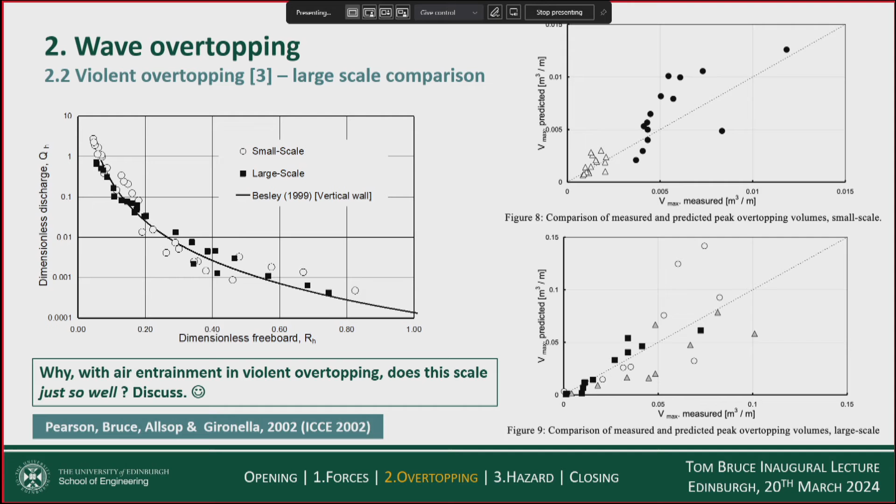But the mass of water that goes over does scale very well, and obviously the wave kinematics up to that point seem to scale very well, because the large-scale tests are the black ones here and the small-scale tests are the white ones. So we got really, really good scale results. And over on the right, we won't go into that, but these are the individual wave volumes. Remember, I said sometimes we're interested in the actual volumes of individual events, and actually they scaled very well too between the small-scale tests at Edinburgh and the large-scale tests in Barcelona.

And the last step in the journey of getting robust engineering guidance, going from small-scale to large-scale, is to go to the field. Field studies are notoriously difficult. Nature tends to give you the mildest winter and the gentlest winter on record if you've gone to great trouble to put expensive equipment out at the coast.

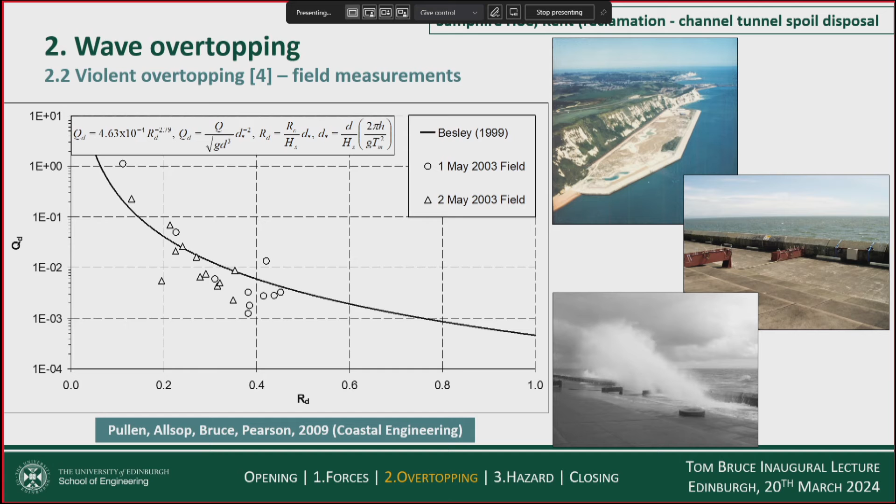And they set up these wave overtopping measuring devices on the crown deck of the breakwater there. And while there's a fair bit of scatter, nevertheless, the level of agreement is very encouraging between the line derived from small-scale tests, tested further in large-scale tests, and then eventually looked at in the field.

I really don't have time to do this one today, but I was good. Very rarely do I, as an academic, get to do some consultancy. We had a lovely piece of consultancy brought our way by Jentsje from the town of Harlingen in the northern part of the Netherlands, who were improving their 1 in 10,000 year sea defences and looking at using quite novel structures to do that.

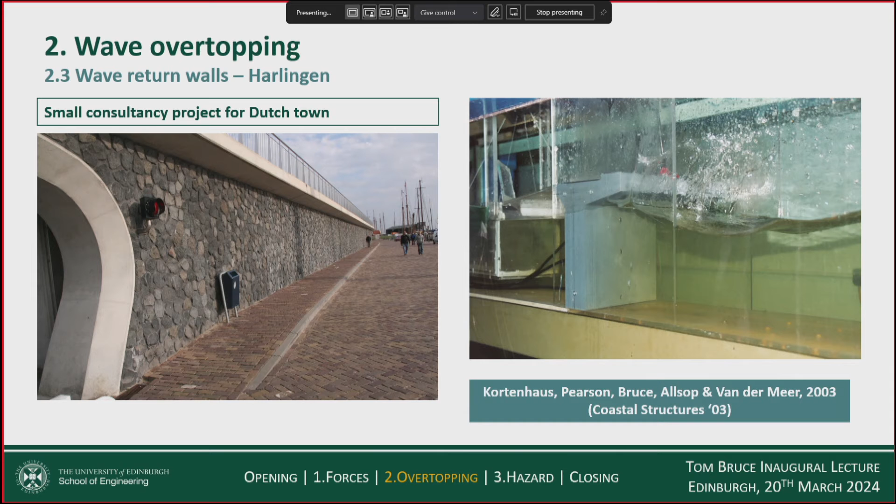And we had a wonderful visit from some of the seniors of the town of Harlingen, and we viewed the tests, and we had, if I remember correctly, a fantastic haggis, neeps and tatties supper in my old bachelor flat in Bruntsfield with a group of about 10 or 12 wonderful Dutch colleagues. And I'm not going to do this one now.

This one brings us right up to date. Jentsje, Leopoldo, and myself are involved in trying to push the limits here. The previous graphs I showed you had relative freeboards of up to about 3 or 4, and we've just taken it to extreme. We're extreme coastal engineers, and we're taking these extremely high structures up to relative freeboards of 9, 10, even towards 11, looking at how waves can get over the highest of high jumps there. That could be important when you're designing where you really need extraordinarily low wave overtopping. And we're not going to do the video because time is a little bit against us.

The last slide on overtopping is to say, well, what's the point of all of this? And I'm very, very privileged to have been part of a huge team which brought together this largely European research on wave overtopping. We focus today on vertical structures, but there's a whole lot going on with sloping dikes, on rubble mound structures, armoured structures, and so on. And very privileged to be part of the team that brought the outputs of a decade and a half of European research and European-funded research to practice.

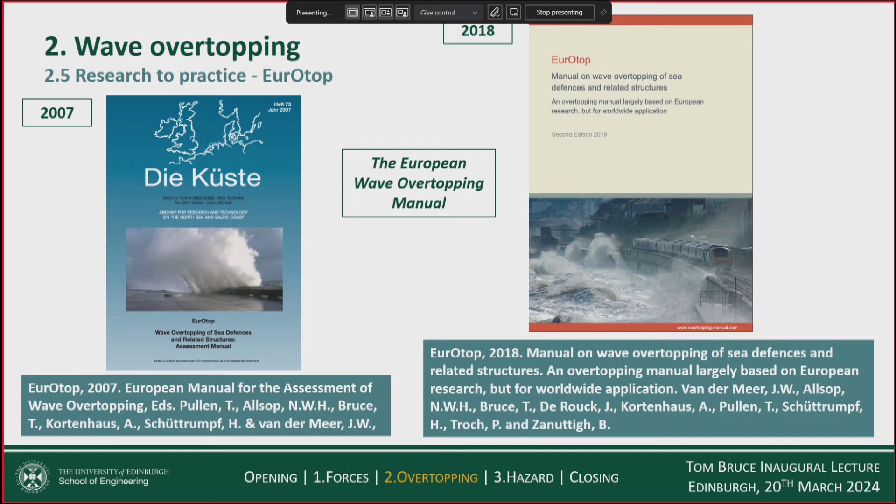First of all, in 2007, with the publication of the first European overtopping manual, and again in 2018, with the second edition of the overtopping manual. So I took a lead on the chapter on vertical structures. We have a couple of other lead authors in the room, William Allsop and Jentsje van der Meer. In fact, Jentsje really was the driving force on the second edition of EurOtop. So I'm very privileged to have been part of that team, and I think this has had a real impact, excuse the pun, on the community.

It's also done me a great service because my Google h-index survives my spending too much time as Dean International and too little time applying for grants. Cover your ears, my bosses. Well, one boss will be happy and the other boss won't be happy. But this manual gets highly referenced, highly cited, so it keeps my nose clean in citation land.

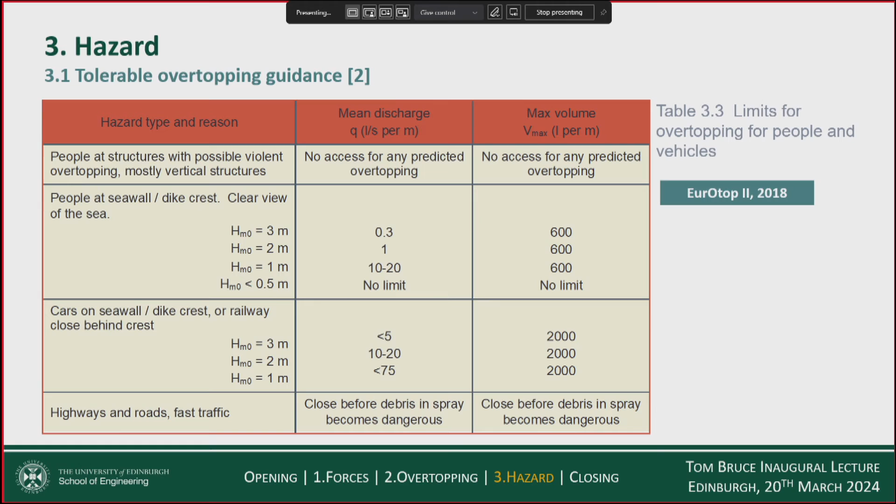And so now you see that the limits based upon individual wave volumes are given. And hand in hand with that are better techniques to predict those volumes. So you can't just say, well, you have to limit it to 600 litres per metre and not tell you how. So we need better techniques to actually predict those volumes. And those techniques are pretty good now. So this is now part of guidance, but it's still not the whole story.

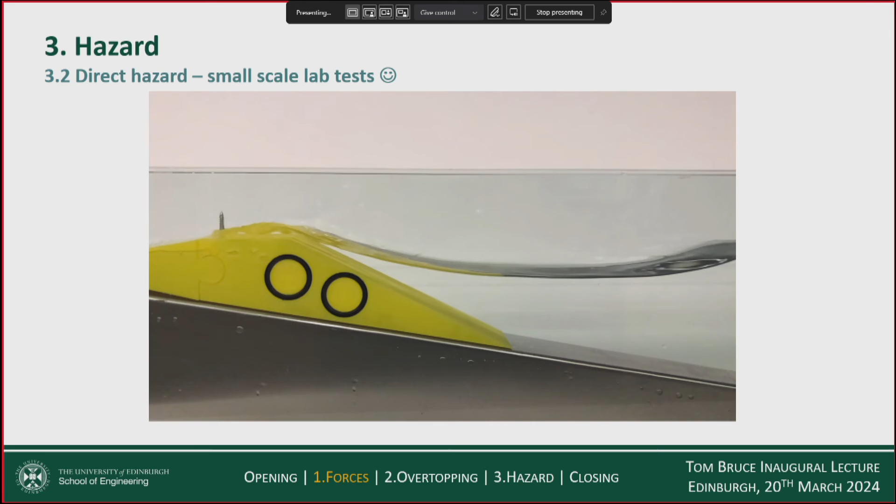As the whole story comes back to what we saw earlier, which is it's actually the water rushing around your ankles that knocks you over. It's not the volume that knocks you over, it's the speed and the depth of the water. So it's the drag force on your legs versus the available friction between your feet and the ground. It's not much more to it than that. So that's a very small scale study. There's actually been quite a lot of studies of this, dating back to the 80s, in fact.

And you can see there pictures from some American tests in a channel, some Finnish tests, again, in a channel, and some really pioneering tests at the very, very large wave channel in the Netherlands, the Delta Flume. You see what they've all got in common. They're all wearing harnesses, okay? Now, if you see the video of the Delta Flume one, I think this guy is scared. It's a very, very big flume. So I think he is a little bit scared, but these guys are not scared.

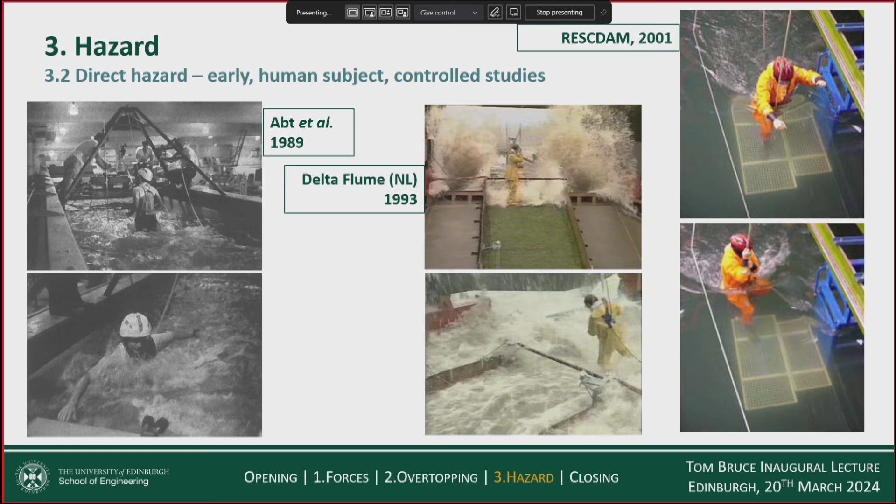These are graduate students. They're highly competitive, and they get multiple goes to try and do better than their mates. Okay? So they're having a fantastic time. And this guy's not too scared. There was a British piece of work which actually employed a professional stunt person to do it, so they weren't scared either. So those are great tests, so don't misunderstand me. Those are seminal tests and part of the literature of immense importance. But there's limits. I'm applying my critique to that. They're fantastic tests, but there's limits.

I can't remember if this came up in the Fluid Mechanics 2 exam paper not too long ago, but basically it is just that model of the drag of the water around your legs. So half CD rho A U squared, as you'll remember correctly, versus the friction, which is just your normal reaction times the friction coefficient. Okay, it's as simple as that, almost as simple as that. And so those are the models.

There's a model for where you might get pushed over, but that's for deep water. That's when the moment applied to you by the water exceeds the righting moment that you can apply by doing this or something like that, okay? But actually in the shallow conditions, the moment instability is not important. It's the water rushing around your ankles and your calves that is important.

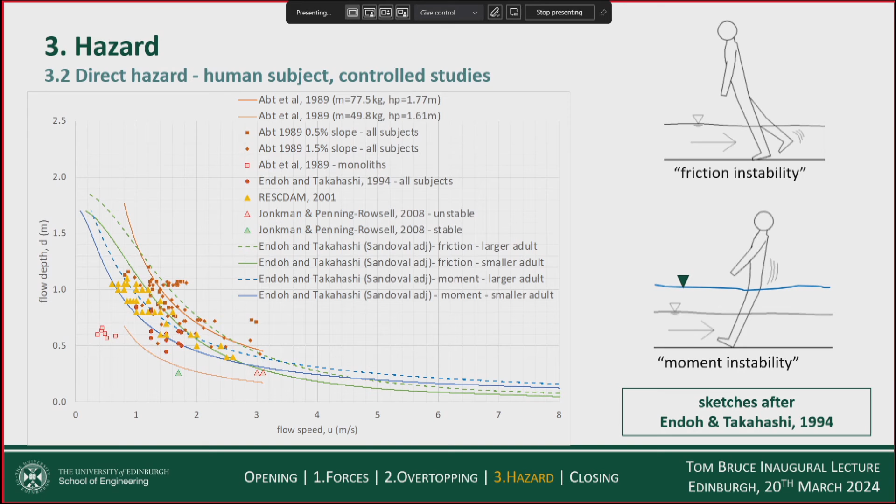And so these lines here are very simple analytical or theoretical models based around those very simple concepts. And what we see is that the lines agree quite well with the data that's been measured in the lab. But the data kind of stops here. So this is where my MPhil student Claudio Sandoval kicked in. We've talked about lab tests already, and the next step after lab tests is to go to the field. So how do you go to the field to look at overtopping hazard? Well, Claudio went to the YouTube resource to look at real accidents.

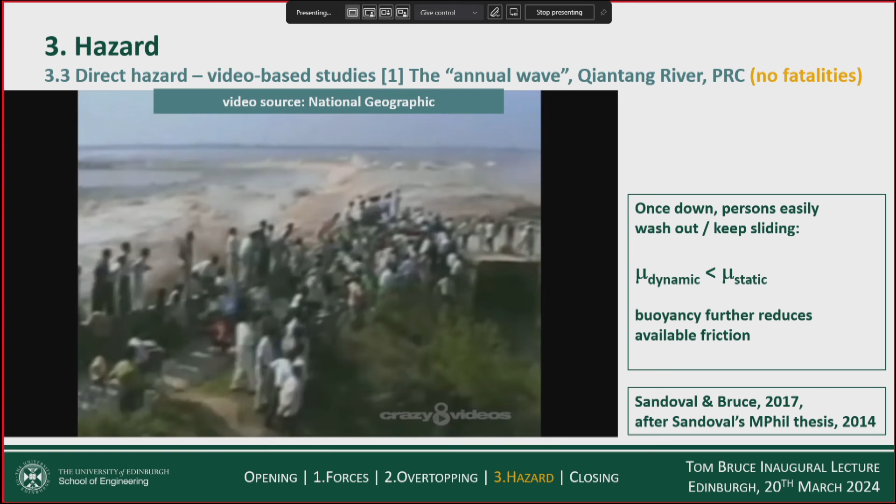And so Claudio looked at this video and analysed the people as they went down, and from the video could estimate the speed and the depth of the flow at the point where they went down. So we'll let you see this. Look away now if you're squeamish. It's also quite loud, I think, so let's see.

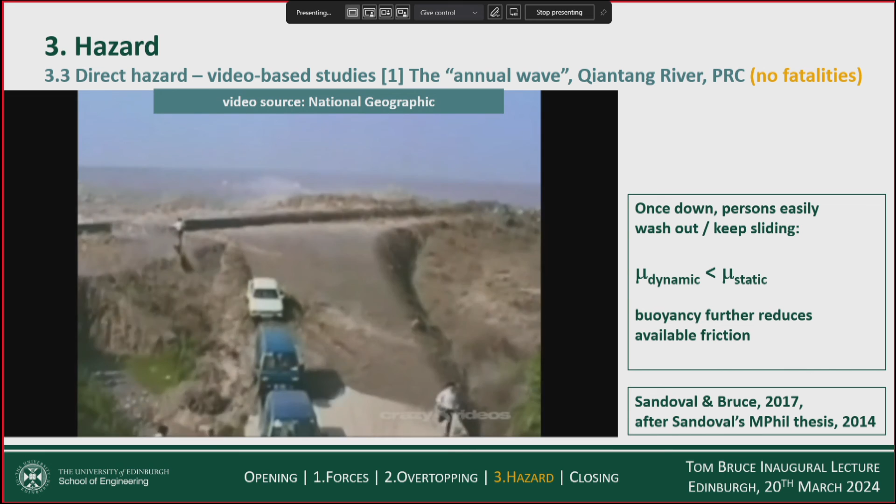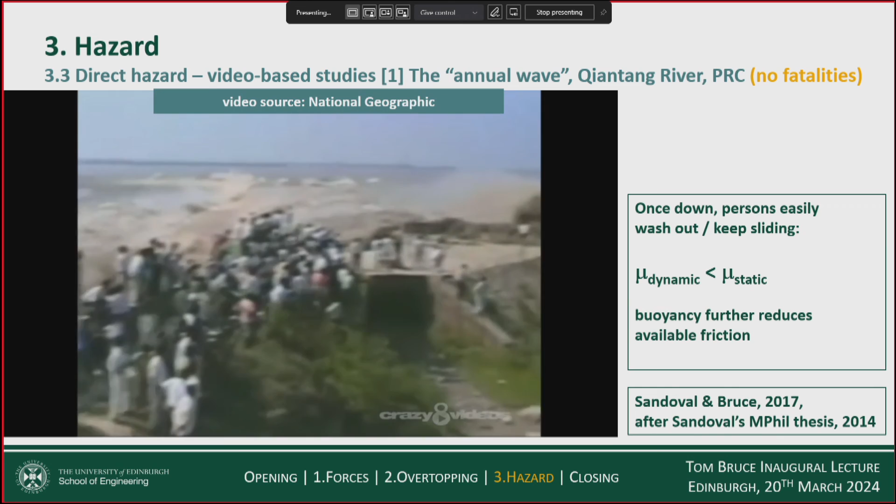Oh, we're stuck on loop. You've probably seen enough of that. It's interesting to note in passing that once people are down, they really go, because the coefficient of friction, dynamic friction, is always less than static friction. So once they're down, they're away. Here's a second clip that Claudio analysed.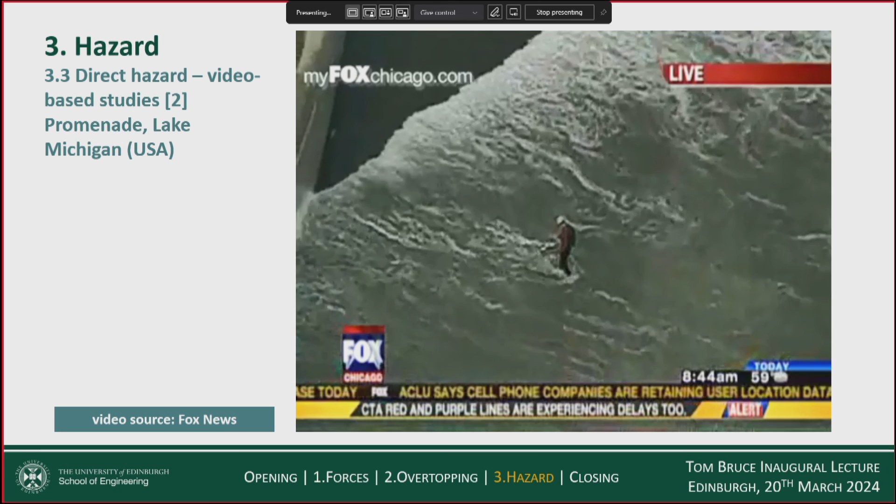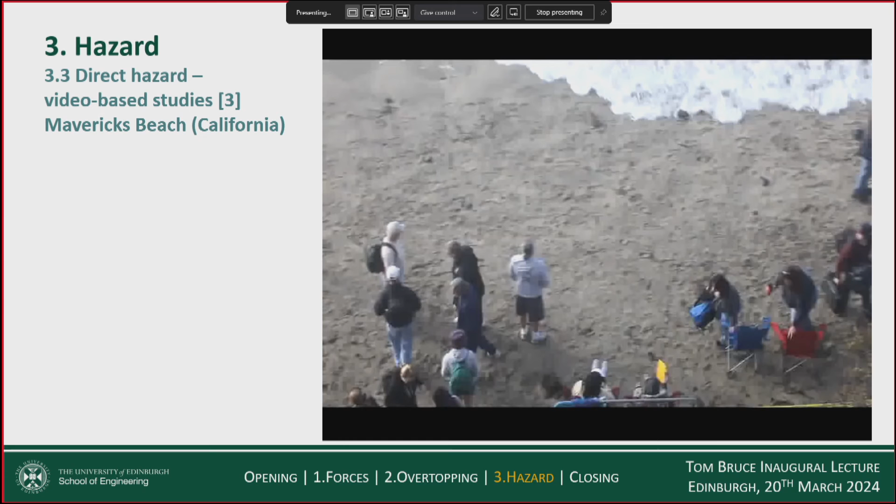Spoiler alert, happy ending. So, lesson for this evening, don't chase your bicycle over the edge of a breakwater either, okay? Let the bike go. Insure your bike and let it go. And the third clip was this one here, which was at a surfing competition at Mavericks Beach, California.

And what's really touching there is the levels of sympathy from the crowd. So we don't believe anybody was seriously damaged in that, but again, it gave Claudio some much needed genuine field data. So you've got the element of surprise, which is absent in the lab. You've got the element of fear, which is absent in the lab, and we've got some quite good quantitative data.

And when that is plotted, really rather delightfully, it filled that great big gap. It turned out to be all to the right on that graph of where the previous studies had been. The previous studies had been conceived and funded looking at the risks of fluvial flooding, river flooding. And so the depths were higher, the speeds were slower. Here we've got situations where you've got really high speed, shallow flows.

It's the same axes, the depth and the speed, and the red markers are where people went down, the black markers are where people stayed up, and the lower theoretical line is the one to look at. That's the most critical one. And you can see that actually it seems to work really, really well. This person stayed up, but that was their second attempt.

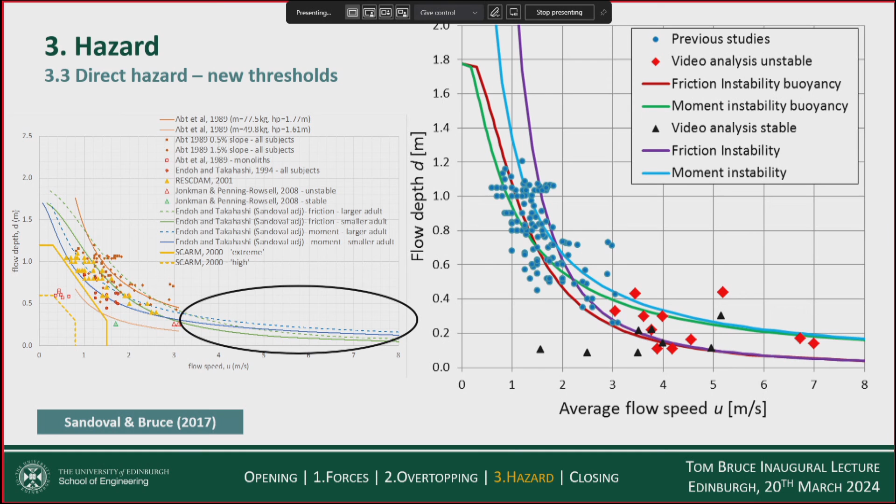They'd already gone down, so they kind of saw it coming. So this is very encouraging. And just to bring things bang up to date before I close, some tests done by Jentje and Dutch colleagues on a dike in the Netherlands.

The fluid mechanics 2, you'll get a cold sweat looking at that yellow box, because it's frequently appeared in examination papers in all sorts of guises. That is Jentje's overtopping simulator, and it's been very handy for a number of exam questions over the years. So what it's doing here is it's loosing off controlled volumes of water down this slope.

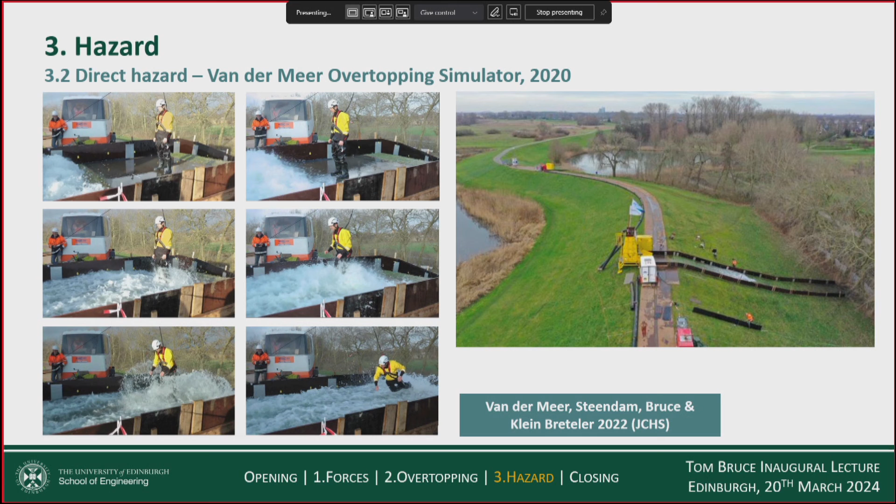Now you might say this is not quite the same as is real, because you haven't got surprise and you've not got fear. But what these tests have got is full scale and amazing instrumentation. So we're making pretty good guesses at speeds and depths from the video, but this is spot on. So these are really, really valuable tests. And you can see some stills from the pictures there.

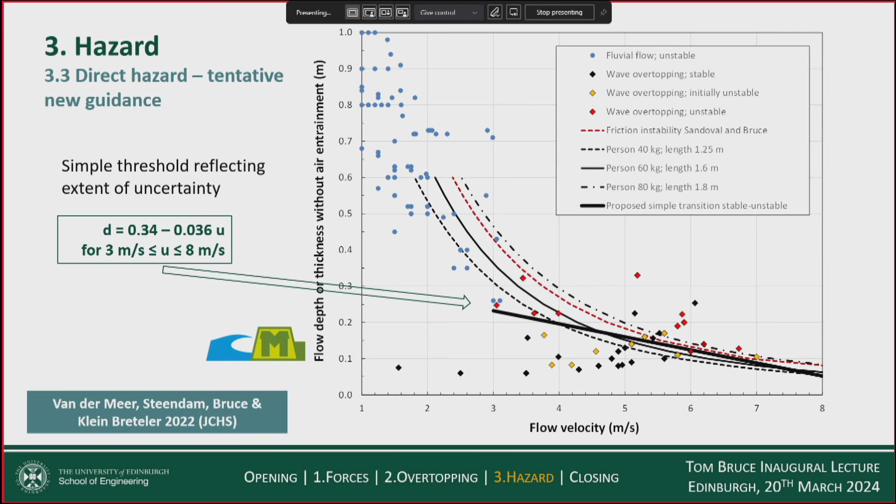And happily, for our friendship, Jentje, the results came out very close to what we had found from the video and what we'd extrapolated from previous tests. And Jentje, being a much more practical engineer than I am, decided that for practical purposes, and probably quite correctly, a good straight line would do there. And so we have, for the first time, some guidance based upon flow speeds and flow depths. So that's where we're at. It's a very exciting point to be.

We're not going to do the woo clap again. I was going to see if you changed your view of the coast.

So just to conclude then, we need a punchline. We're trying to reduce uncertainties, and it's an opportunity to make the best of the resources we have in an era of climate change, with ever greater demands on the coast, ever greater economic development, and ever greater challenges from the environment. So this is important stuff in that respect.

Collaboration is great. Conclusion number 2, I wouldn't be anywhere close to where I am without amazing collaborators, and it's been the joy of my professional life to work with collaborators across Europe in developing some of these models and these tools. My conclusion number 3 is that physical modelling is still essential. It's a fantastic tool. It's still a crucial tool.

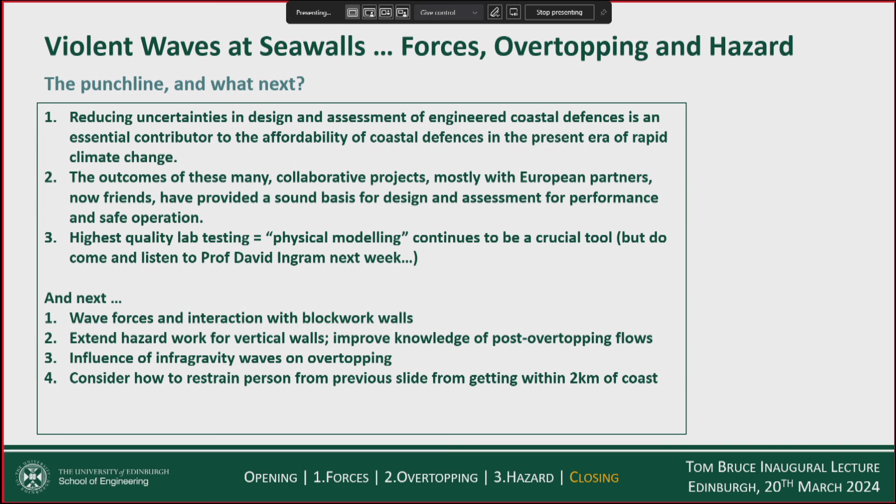So what about next? Well, there's a lot more to be learned about blockwork walls, ever more at risk, ever more neglected. We need to improve our knowledge of the direct hazard to other structures, to vertical wall structures. We might be interested in infragravity waves, and we certainly need to think how we can restrain the person on the previous slide from getting within about 2 kilometres of the coast again. So I think with that, sorry I've run over time, but thank you very much for your attention.